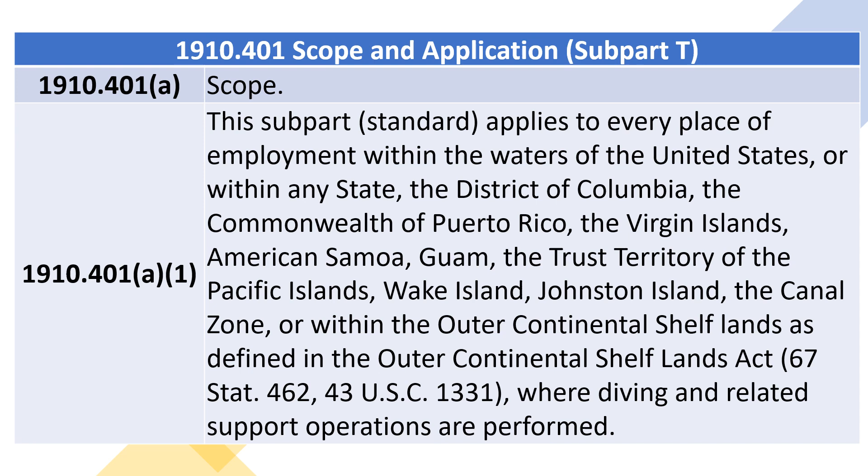1910.401, A2: This standard applies to diving and related support operations conducted in connection with all types of work and employments, including general industry, construction, ship repairing, shipbuilding, shipbreaking, and longshoring. However, this standard does not apply to any diving operation.

1910.401, A2, I through A2, 3: performed solely for instructional purposes, using open circuit, compressed air SCUBA, and conducted within the no decompression limits.

Performed solely for search, rescue, or related public safety purposes by or under the control of a governmental agency, or governed by 45 CFR Part 46, Protection of Human Subjects, U.S. Department of Health and Human Services, or equivalent rules or regulations established by another federal agency, which regulate research, development, or related purposes involving human subjects.

1910.401, A2, 4: defined as scientific diving and which is under the direction and control of a diving program containing at least the following elements.

1910.401, A2, 4, A: Diving Safety Manual, which includes at a minimum, procedures covering all diving operations specific to the program, procedures for emergency care, including recompression and evacuation, and criteria for diver training and certification.

1910.401, A2, 4, B: Diving Control, Safety, Board, with the majority of its members being active divers, which shall at a minimum have the authority to approve and monitor diving projects, review and revise the Diving Safety Manual, assure compliance with the manual, certify the depths to which a diver has been trained, take disciplinary action for unsafe practices, and assure adherence to the buddy system.

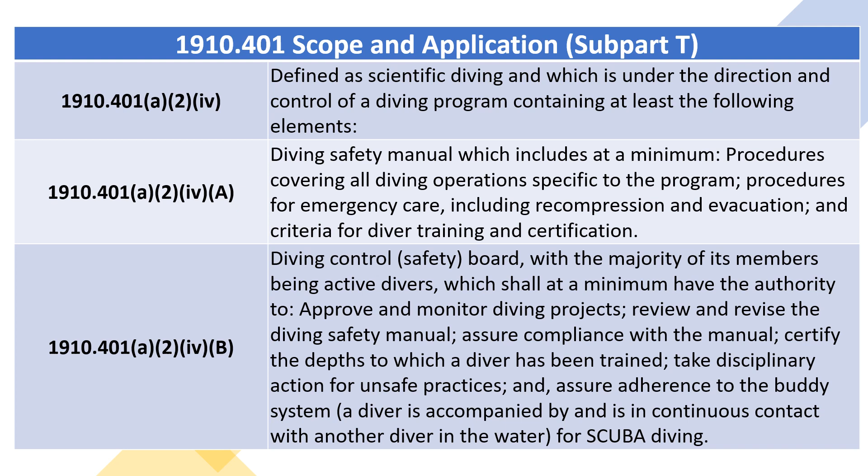1910.401, A3: Alternative Requirements for Recreational Diving Instructors and Diving Guides. Employers of recreational diving instructors and diving guides are not required to comply with the decompression chamber requirements specified by paragraphs B2 and C3 of Section 1910.423 and paragraph B1 of Section 1910.426 when they meet all of the following conditions.

1910.401, A3, I through A3: The instructor or guide is engaging solely in recreational diving instruction or dive guiding operations. The instructor or guide is diving within the no decompression limits in these operations.

The instructor or guide is using a nitrox breathing gas mixture consisting of a high percentage of oxygen, more than 22% by volume, mixed with nitrogen.

The instructor or guide is using an open circuit, semi-closed circuit, or closed circuit self-contained underwater breathing apparatus, SCUBA, and the employer of the instructor or guide is complying with all requirements of Appendix C of this subpart.

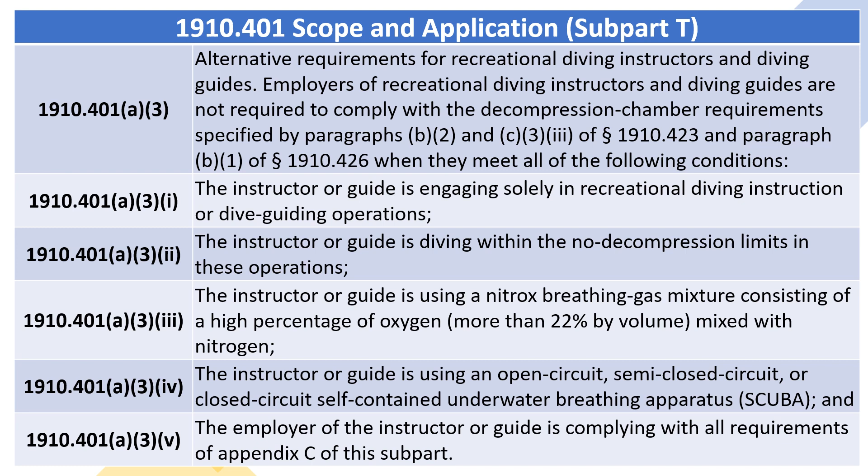1910.401, B: Application in Emergencies. An employer may deviate from the requirements of this standard to the extent necessary to prevent or minimize a situation which is likely to cause death, serious physical harm, or major environmental damage, provided that the employer 1910.401, B1, notifies...

Notifies the Area Director, Occupational Safety and Health Administration within 48 hours of the onset of the emergency situation, indicating the nature of the emergency and extent of the deviation from the prescribed regulations, and 1910.401, B2, upon request from the Area Director, submits such information in writing.

1910.401, C: Employer Obligation. The employer shall be responsible for compliance with 1910.401, C1, all provisions of this standard of general applicability, and 1910.401, C2, all requirements pertaining to specific diving modes to the extent diving operations in such modes are conducted.

1910.402. Definitions. As used in this standard, the listed terms are defined as follows: ACFM, actual cubic feet per minute. ASME code or equivalent: ASME, American Society of Mechanical Engineers, Boiler and Pressure Vessel Code, Section 8, or an equivalent code which the employer can demonstrate to be equally effective.

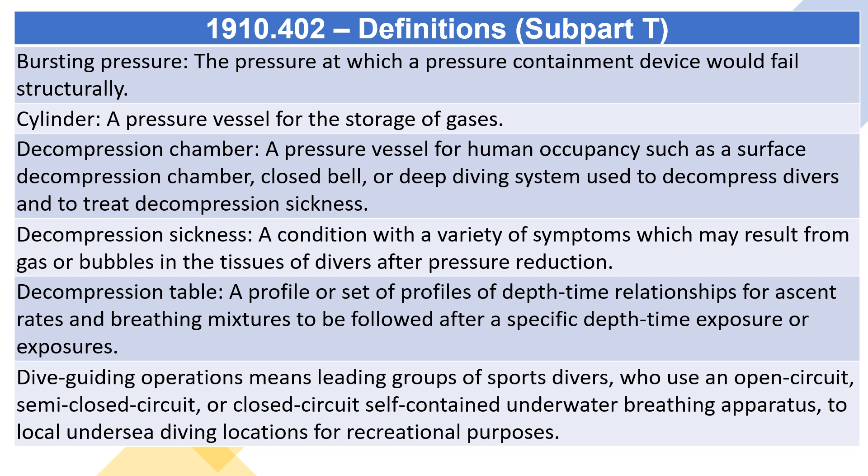Dive location: a surface or vessel from which a diving operation is conducted. Dive location reserve breathing gas: a supply system of air or mixed gas, as appropriate, at the dive location which is independent of the primary supply system and sufficient to support divers during the planned decompression.

Dive team: divers and support employees involved in a diving operation, including the designated person in charge. Diver: an employee working in water using underwater apparatus which supplies compressed breathing gas at the ambient pressure.

Diver carried reserve breathing gas: a diver carried supply of air or mixed gas, as appropriate, sufficient under standard operating conditions to allow the diver to reach the surface, or another source of breathing gas, or to be reached by a standby diver. Diving mode: a type of diving requiring specific equipment, procedures and techniques - SCUBA, surface supplied air, or mixed gas.

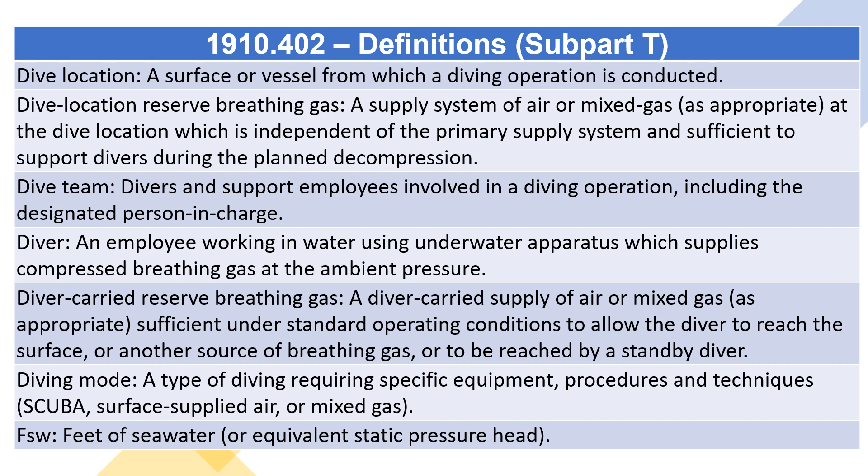FSW: feet of seawater, or equivalent static pressure head. Heavy gear: diver worn deep sea dress including helmet, breastplate, dry suit, and weighted shoes. Hyperbaric conditions: pressure conditions in excess of surface pressure.

In-water stage: a suspended underwater platform which supports a diver in the water. Liveboating: the practice of supporting a surface-supplied air or mixed gas diver from a vessel which is underway. Mixed gas diving: a diving mode in which the diver is supplied in the water with a breathing gas other than air.

No decompression limits: the depth time limits of the no decompression limits and repetitive dive group designation table for no decompression air dives, US Navy diving manual, or equivalent limits which the employer can demonstrate to be equally effective. PSIG: pounds per square inch, gauge.

Recreational diving instruction means training diving students in the use of recreational diving procedures and the safe operation of diving equipment, including an open circuit, semi-closed circuit, or closed circuit self-contained underwater breathing apparatus during dives.

Scientific diving means diving performed solely as a necessary part of a scientific, research, or educational activity by employees whose sole purpose for diving is to perform scientific research tasks. Scientific diving does not include performing any tasks usually associated with commercial diving, such as placing or removing heavy objects underwater, inspection of pipelines and similar objects, construction, demolition, cutting or welding, or the use of explosives.

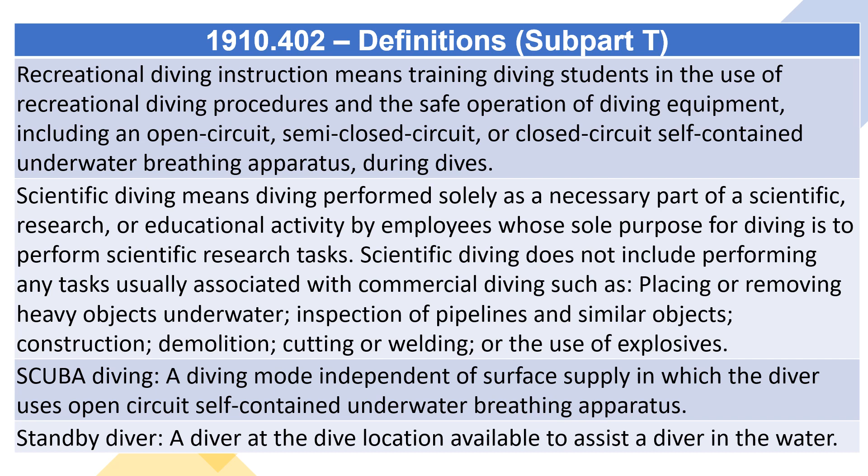Surface-supplied air diving: a diving mode in which the diver in the water is supplied from the dive location with compressed air for breathing. Treatment table: a depth time and breathing gas profile designed to treat decompression sickness.

Umbilical: the composite hose bundle between a dive location and a diver or bell, or between a diver and a bell, which supplies the diver or bell with breathing gas, communications, power, or heat as appropriate to the diving mode or conditions, and includes a safety line between the diver and the dive location.

Volume tank: a pressure vessel connected to the outlet of a compressor and used as an air reservoir. Working pressure: the maximum pressure to which a pressure containment device may be exposed under standard operating conditions.

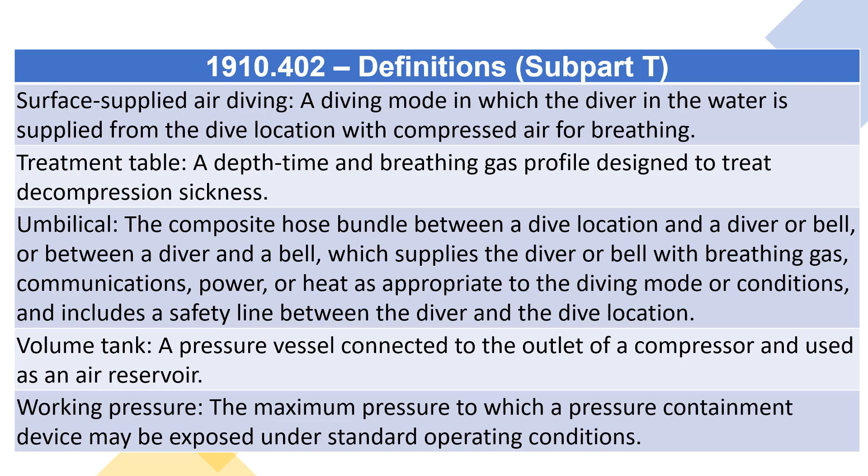1910.410 Qualifications of Dive Team. A. General. 1. Each dive team member shall have the experience or training necessary to perform assigned tasks in a safe and healthful manner.

1910.410 A.2. Each dive team member shall have experience or training in the following: 1910.410 A.2.i through A.2.iii - the use of tools, equipment, and systems relevant to assigned tasks, techniques of the assigned diving mode, and diving operations and emergency procedures.

1910.410 A.3. All dive team members shall be trained in cardiopulmonary resuscitation and first aid, American Red Cross standard course or equivalent.

1910.410 A.4. Dive team members who are exposed to or control the exposure of others to hyperbaric conditions shall be trained in diving-related physics and physiology.

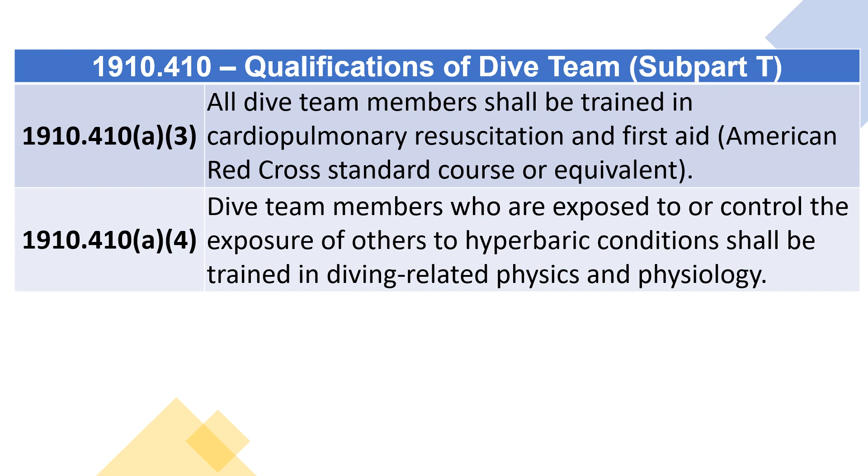1910.410 B. Assignments. 1. Each dive team member shall be assigned tasks in accordance with the employee's experience or training, except that limited additional tasks may be assigned to an employee undergoing training, provided that these tasks are performed under the direct supervision of an experienced dive team member.

1910.410(b)(2). The employer shall not require a dive team member to be exposed to hyperbaric conditions against the employee's will, except when necessary to complete decompression or treatment procedures.

1910.410(b)(3). The employer shall not permit a dive team member to dive or be otherwise exposed to hyperbaric conditions for the duration of any temporary physical impairment or condition which is known to the employer and is likely to affect adversely the safety or health of a dive team member.

1910.410(c). Designated person in charge. 1910.410(c)(1). The employer or an employee designated by the employer shall be at the dive location in charge of all aspects of the diving operation affecting the safety and health of dive team members. 1910.410(c)(2). The designated person in charge shall have experience and training in the conduct of the assigned diving operation.

1910.420 Safe Practices Manual. 1910.420(a). General. The employer shall develop and maintain a safe practices manual which shall be made available at the dive location to each dive team member.

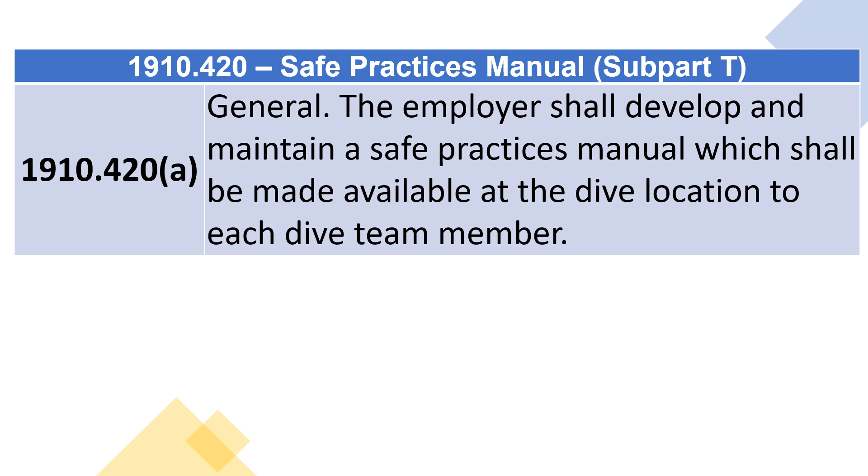1910.420(b). Contents. 1910.420(b)(1). The Safe Practices Manual shall contain a copy of this standard and the employer's policies for implementing the requirements of this standard.

1910.420(b)(2). For each diving mode engaged in, the Safe Practices Manual shall include (i) through (iv): safety procedures and checklists for diving operations, assignments and responsibilities of the dive team members, equipment procedures and checklists, and emergency procedures for fire, equipment failure, adverse environmental conditions, and medical illness and injury.

1910.421 Pre-dive procedures. 1910.421(a). General. The employer shall comply with the following requirements prior to each diving operation, unless otherwise specified.

1910.421(b). Emergency aid. A list shall be kept at the dive location of the telephone or call numbers of the following: 1910.421(b)(1) through (5): an operational decompression chamber, if not at the dive location, accessible hospitals, available physicians, available means of transportation, and the nearest U.S. Coast Guard Rescue Coordination Center.

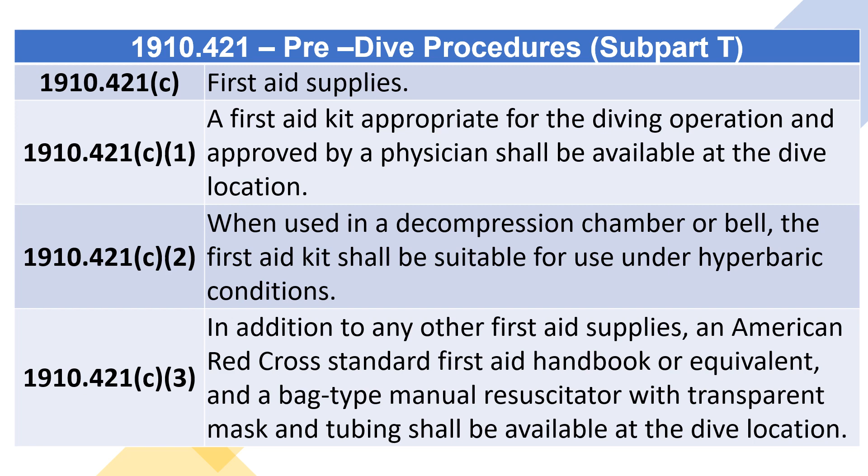1910.421(c)(3). In addition to any other first aid supplies, an American Red Cross Standard First Aid Handbook or equivalent, and a bag-type manual resuscitator with transparent mask and tubing shall be available at the dive location.

1910.421(d). Planning and assessment. Planning of a diving operation shall include an assessment of the safety and health aspects of the following.

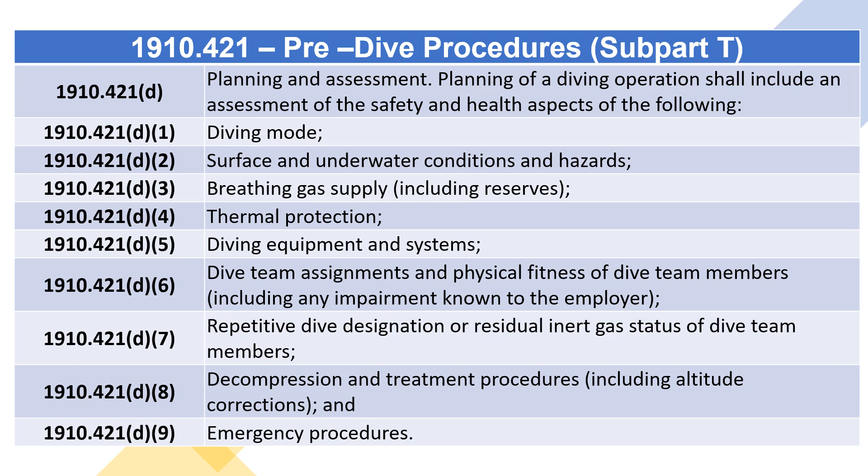1910.421(d)(1) through (9): diving mode, surface and underwater conditions and hazards, breathing gas supply, including reserves, thermal protection, diving equipment and systems, dive team assignments and physical fitness of dive team members, including any impairment known to the employer, repetitive dive designation or residual inert gas status of dive team members, decompression and treatment procedures, including altitude corrections, and emergency procedures.

1910.421(e). Hazardous activities. To minimize hazards to the dive team, diving operations shall be coordinated with other activities in the vicinity which are likely to interfere with the diving operation.

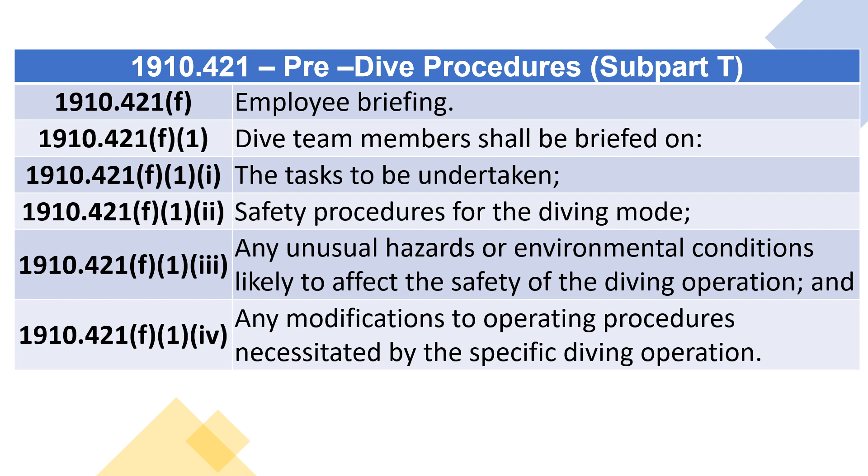1910.421(f). Employee briefing. 1910.421(f)(1). Dive team members shall be briefed on (i) through (iv): the tasks to be undertaken, safety procedures for the diving mode, any unusual hazards or environmental conditions likely to affect the safety of the diving operation, and any modifications to operating procedures necessitated by the specific diving operation.

1910.421(f)(2). Prior to making individual dive team member assignments, the employer shall inquire into the dive team member's current state of physical fitness and indicate to the dive team member the procedure for reporting physical problems or adverse physiological effects during and after the dive.

1910.421(g). Equipment inspection. The breathing gas supply system, including reserve breathing gas supplies, masks, helmets, thermal protection, and bell handling mechanism, when appropriate, shall be inspected prior to each dive.

1910.421(h). Warning signal. When diving from surfaces other than vessels in areas capable of supporting marine traffic, a rigid replica of the International Code Flag A at least 1 meter in height shall be displayed at the dive location in a manner which allows all-round visibility, and shall be illuminated during night diving operations.

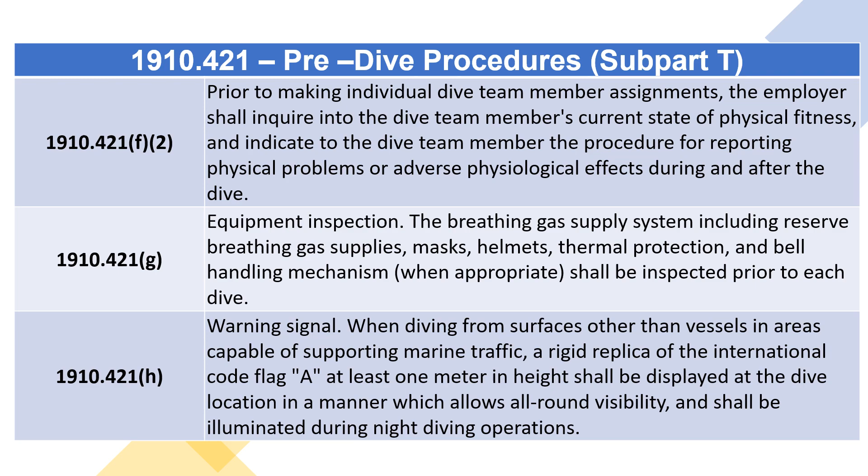1910.422. Procedures during dive. 1910.422(a). General. The employer shall comply with the following requirements which are applicable to each diving operation unless otherwise specified.

1910.422(b). Water entry and exit. 1910.422(b)(1). A means capable of supporting the diver shall be provided for entering and exiting the water. 1910.422(b)(2). The means provided for exiting the water shall extend below the water surface.

1910.422(b)(3): A means shall be provided to assist an injured diver from the water or into a bell.

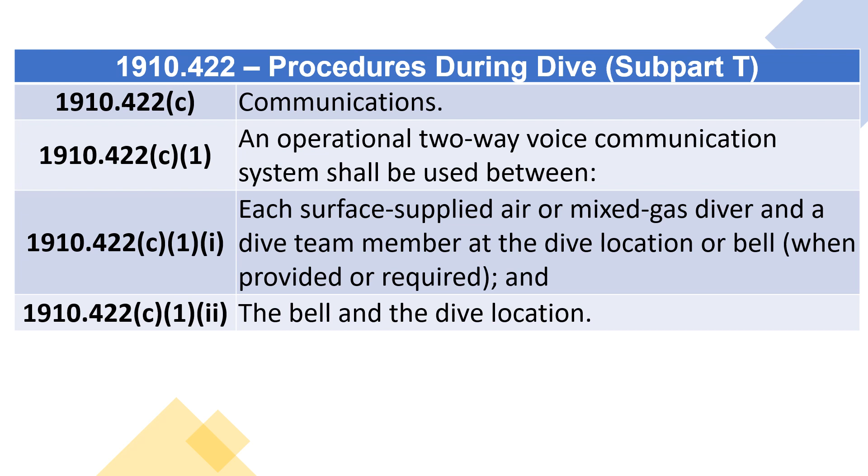1910.422(c) Communications. (c)(1): An operational two-way voice communication system shall be used between each surface-supplied air or mixed gas diver and a dive team member at the dive location or bell, when provided or required, and the bell and the dive location. (c)(2): An operational, two-way communication system shall be available at the dive location to obtain emergency assistance.

1910.422(d) Decompression tables: Decompression, repetitive, and no decompression tables, as appropriate, shall be at the dive location. 1910.422(e) Dive profiles: A depth time profile, including when appropriate any breathing gas changes, shall be maintained for each diver during the dive, including decompression.

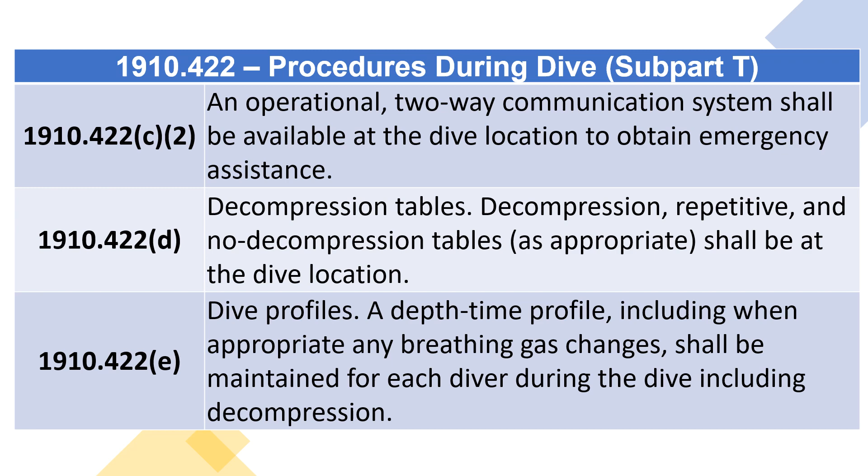1910.422(f) Handheld power tools and equipment. (f)(1): Handheld electrical tools and equipment shall be de-energized before being placed into or retrieved from the water. (f)(2): Handheld power tools shall not be supplied with power from the dive location until requested by the diver.

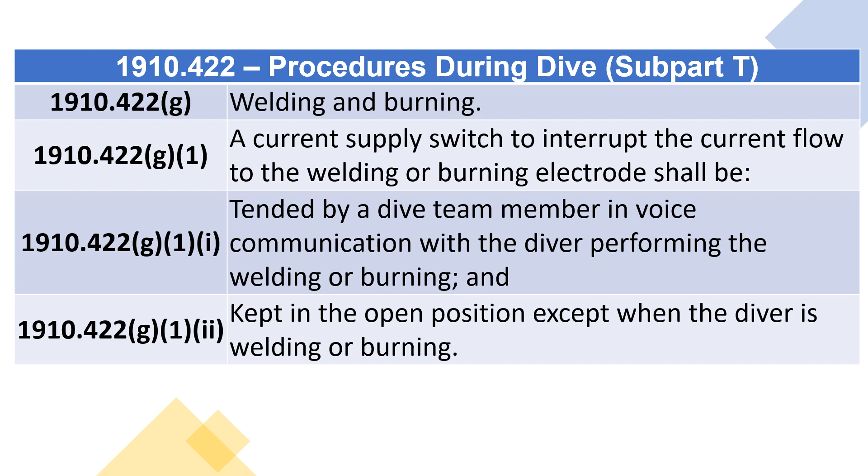1910.422(g) Welding and burning. (g)(1): A current supply switch to interrupt the current flow to the welding or burning electrode shall be tended by a dive team member in voice communication with the diver performing the welding or burning, and kept in the open position except when the diver is welding or burning.

1910.422(g)(2): The welding machine frame shall be grounded. (g)(3): Welding and burning cables, electrode holders, and connections shall be capable of carrying the maximum current required by the work, and shall be properly insulated. (g)(4): Insulated gloves shall be provided to divers performing welding and burning operations.

1910.422(g)(5): Prior to welding or burning on closed compartments, structures, or pipes, which contain a flammable vapor or in which a flammable vapor may be generated by the work, they shall be vented, flooded, or purged with a mixture of gases which will not support combustion.

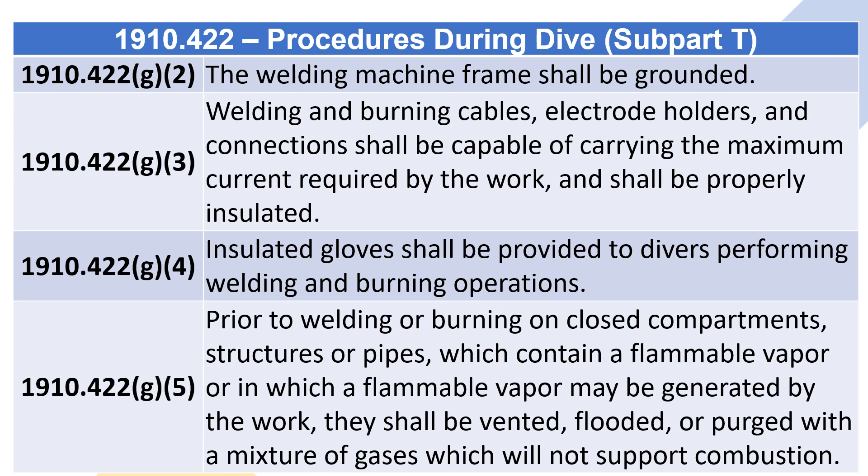1910.422(h) Explosives. (h)(1): Employers shall transport, store, and use explosives in accordance with this section and the applicable provisions of sections 1910.109 and 1926.912 of Title 29 of the Code of Federal Regulations. (h)(2): Electrical continuity of explosive circuits shall not be tested until the diver is out of the water. (h)(3): Explosives shall not be detonated while the diver is in the water.

1910.422(i) Termination of dive. The working interval of a dive shall be terminated when: (i)(1) a diver requests termination; (i)(2) a diver fails to respond correctly to communications or signals from a dive team member.

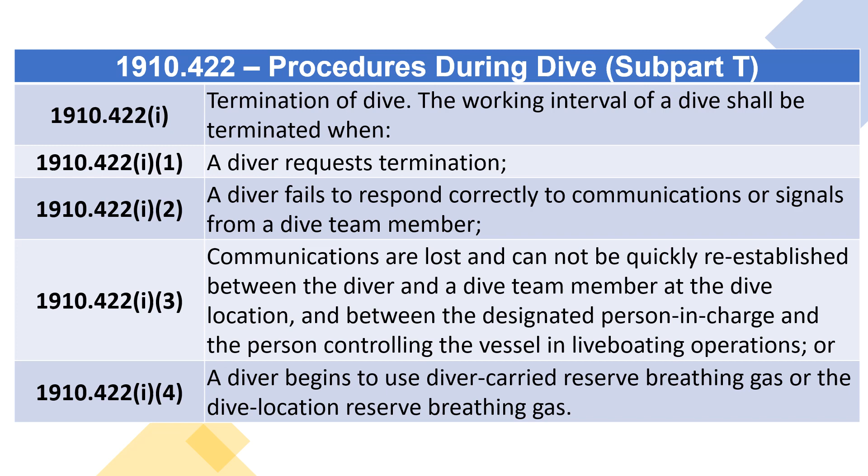1910.422(i)(3): Communications are lost and cannot be quickly re-established between the diver and a dive team member at the dive location, and between the designated person in charge and the person controlling the vessel in live boating operations; or (i)(4): a diver begins to use diver-carried reserve breathing gas or the dive location reserve breathing gas.

1910.423 Post-dive procedures. (A) General: The employer shall comply with the following requirements which are applicable after each diving operation, unless otherwise specified.

1910.423(b) Precautions. (b)(1): After the completion of any dive, the employer shall check the physical condition of the diver; instruct the diver to report any physical problems or adverse physiological effects, including symptoms of decompression sickness; advise the diver of the location of a decompression chamber which is ready for use; and alert the diver to the potential hazards of flying after diving.

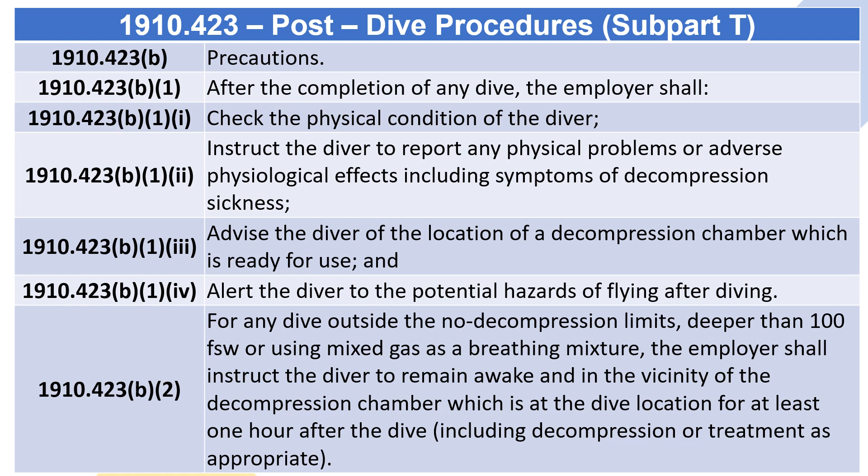1910.423(b)(2): For any dive outside the no decompression limits, deeper than 100 FSW, or using mixed gas as a breathing mixture, the employer shall instruct the diver to remain awake and in the vicinity of the decompression chamber which is at the dive location for at least 1 hour after the dive, including decompression or treatment as appropriate.

1910.423(c) Recompression capability. (c)(1): A decompression chamber capable of recompressing the diver at the surface to a minimum of 165 FSW, 6 ATA, shall be available at the dive location for surface supplied air diving to depths deeper than 100 FSW and shallower than 220 FSW; mixed gas diving shallower than 300 FSW; or diving outside the no decompression limits shallower than 300 FSW.

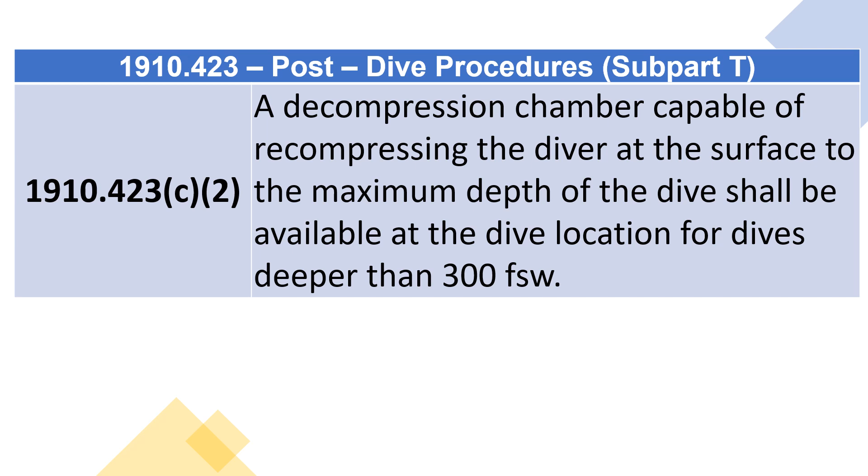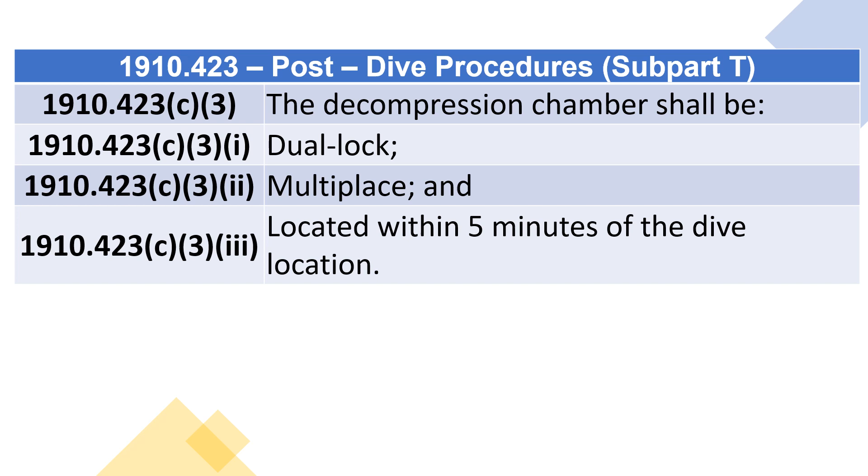1910.423(c)(2): A decompression chamber capable of recompressing the diver at the surface to the maximum depth of the dive shall be available at the dive location for dives deeper than 300 FSW. (c)(3): The decompression chamber shall be dual lock, multi-place, and located within 5 minutes of the dive location.

1910.423(c)(4): The decompression chamber shall be equipped with a pressure gauge for each pressurized compartment designed for human occupancy; a built-in breathing system with a minimum of 1 mask per occupant; a two-way voice communication system between occupants and a dive team member at the dive location; and a viewport and illumination capability to light the interior.

1910.423 C5: Treatment tables, treatment gas appropriate to the diving mode, and sufficient gas to conduct treatment shall be available at the dive location. 1910.423 C6: A dive team member shall be available at the dive location during and for at least 1 hour after the dive to operate the decompression chamber, when required or provided.

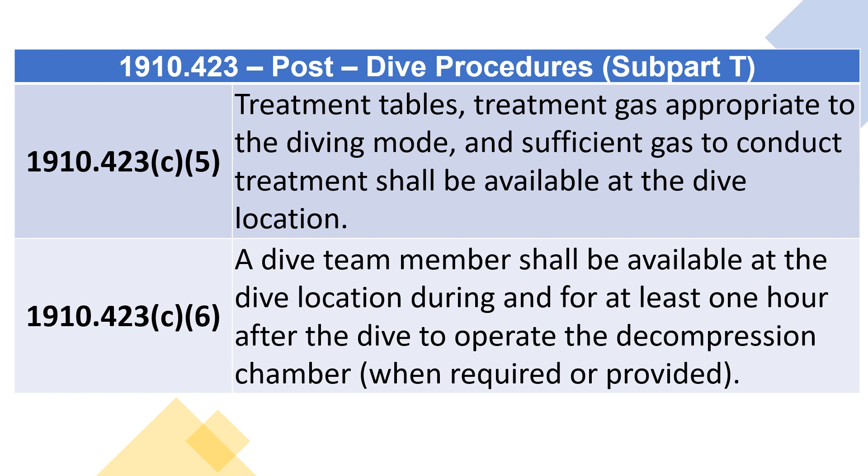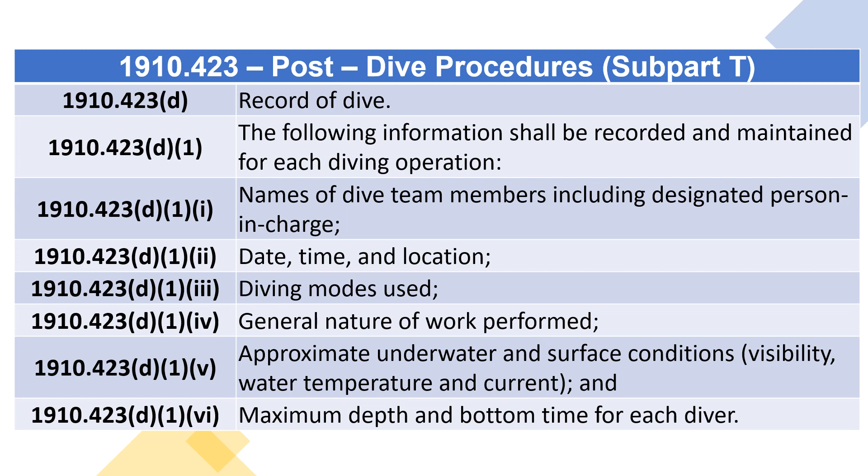1910.423 D: Record of dive. D1: The following information shall be recorded and maintained for each diving operation: names of dive team members including designated person in charge, date, time, and location, diving modes used, general nature of work performed, approximate underwater and surface conditions, visibility, water temperature and current, and maximum depth and bottom time for each diver.

1910.423 D2: For each dive outside the no decompression limits, deeper than 100 FSW, or using mixed gas, the following additional information shall be recorded and maintained: depth, time and breathing gas profiles, decompression table designation including modification, and elapsed time since last pressure exposure if less than 24 hours, or repetitive dive designation for each diver.

1910.423 D3: For each dive in which decompression sickness is suspected or symptoms are evident, the following additional information shall be recorded and maintained: description of decompression sickness symptoms, including depth and time of onset, and description and results of treatment.

1910.423 E: Decompression procedure assessment. The employer shall: E1, investigate and evaluate each incident of decompression sickness based on the recorded information, consideration of the past performance of decompression table used, and individual susceptibility.

1910.423 E2: Take appropriate corrective action to reduce the probability of recurrence of decompression sickness. And E3: Prepare a written evaluation of the decompression procedure assessment, including any corrective action taken, within 45 days of the incident of decompression sickness.

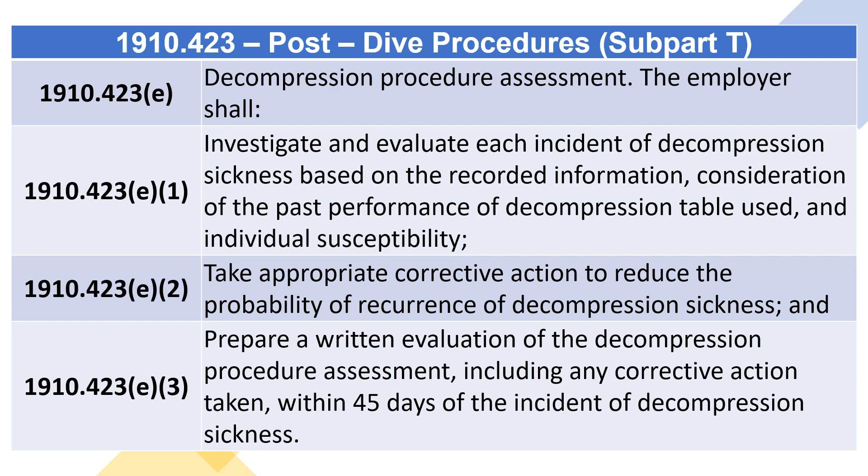1910.424 Scuba diving. A: General. Employers engaged in scuba diving shall comply with the following requirements, unless otherwise specified. B: Limits. Scuba diving shall not be conducted at depths deeper than 130 FSW.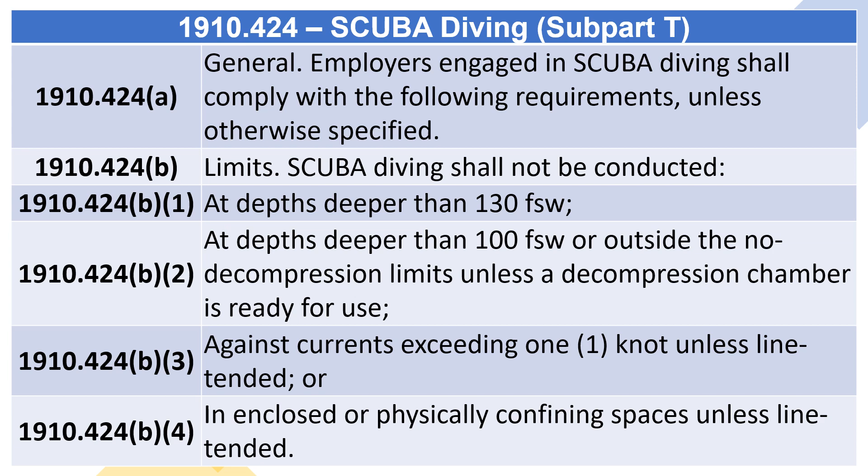1910.424 B2: At depths deeper than 100 FSW or outside the no decompression limits, unless a decompression chamber is ready for use. B3: Against currents exceeding 1 knot unless line tended, or B4: In enclosed or physically confining spaces unless line tended.

1910.424 C: Procedures. C1: A standby diver shall be available while a diver is in the water. C2: A diver shall be line tended from the surface, or accompanied by another diver in the water in continuous visual contact during the diving operations.

1910.424 C3: A diver shall be stationed at the underwater point of entry when diving is conducted in enclosed or physically confining spaces. C4: A diver carried reserve breathing gas supply shall be provided for each diver consisting of a manual reserve J valve, or an independent reserve cylinder with a separate regulator or connected to the underwater breathing apparatus. C5: The valve of the reserve breathing gas supply shall be in the closed position prior to the dive.

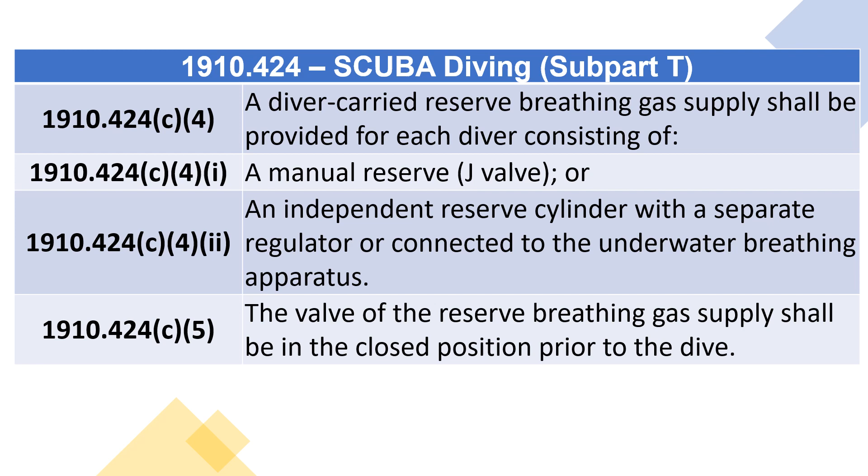1910.425 Surface supplied air diving. A: General. Employers engaged in surface supplied air diving shall comply with the following requirements, unless otherwise specified. B: Limits. B1: Surface supplied air diving shall not be conducted at depths deeper than 190 FSW, except that dives with bottom times of 30 minutes or less may be conducted to depths of 220 FSW.

1910.425 B2: A decompression chamber shall be ready for use at the dive location for any dive outside the no decompression limits or deeper than 100 FSW. B3: A bell shall be used for dives with an in-water decompression time greater than 120 minutes, except when heavy gear is worn or diving is conducted in physically confining spaces.

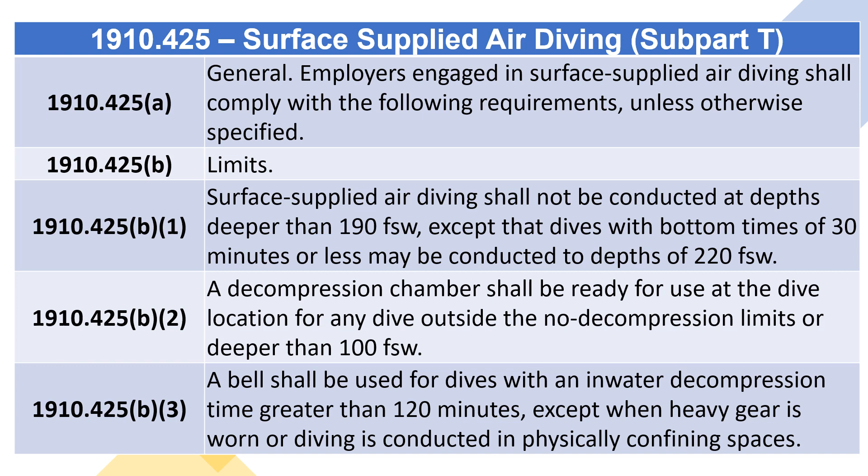1910.425 C: Procedures. C1: Each diver shall be continuously tended while in the water. C2: A diver shall be stationed at the underwater point of entry when diving is conducted in enclosed or physically confining spaces. C3: Each diving operation shall have a primary breathing gas supply sufficient to support divers for the duration of the planned dive, including decompression.

1910.425 C4: For dives deeper than 100 FSW or outside the no decompression limits: a separate dive team member shall tend each diver in the water. A standby diver shall be available while a diver is in the water. A diver carried reserve breathing gas supply shall be provided for each diver except when heavy gear is worn, and a dive location reserve breathing gas supply shall be provided.

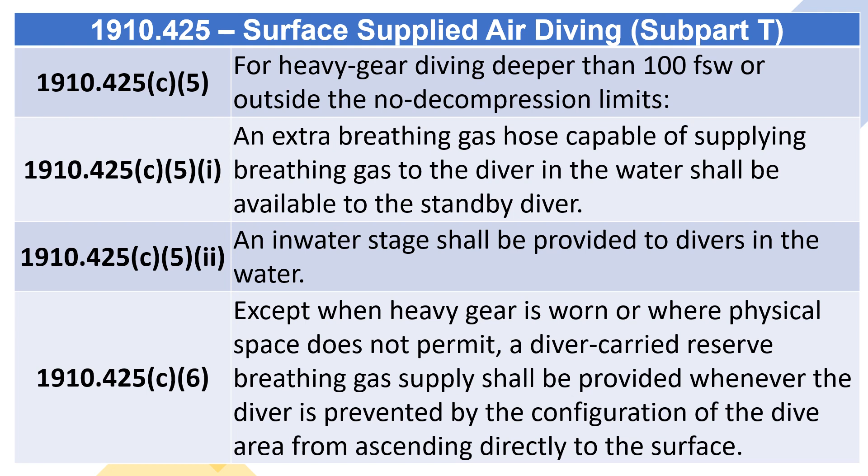1910.425 C5: For heavy gear diving deeper than 100 FSW or outside the no decompression limits: an extra breathing gas hose capable of supplying breathing gas to the diver in the water shall be available to the standby diver, and an in-water stage shall be provided to divers in the water. 1910.425 C6: Except when heavy gear is worn or where physical space does not permit, a diver-carried reserve breathing gas supply shall be provided whenever the diver is prevented by the configuration of the dive area from ascending directly to the surface.

1910.426 Mixed gas diving. A. General: Employers engaged in mixed gas diving shall comply with the following requirements, unless otherwise specified. B. Limits: Mixed gas diving shall be conducted only when a decompression chamber is ready for use at the dive location, and a bell is used at depths greater than 220 FSW or when the dive involves in-water decompression time of greater than 120 minutes, except when heavy gear is worn or when diving in physically confining spaces, or a closed bell is used at depths greater than 300 FSW, except when diving is conducted in physically confining spaces.

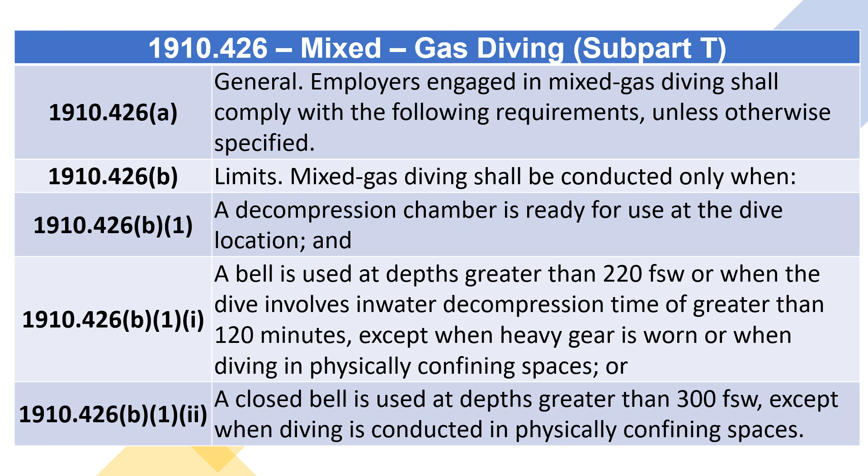1910.426 C. Procedures. C1: A separate dive team member shall tend each diver in the water. C2: A standby diver shall be available while a diver is in the water. C3: A diver shall be stationed at the underwater point of entry when diving is conducted in enclosed or physically confining spaces. C4: Each diving operation shall have a primary breathing gas supply sufficient to support divers for the duration of the planned dive, including decompression. C5: Each diving operation shall have a dive location reserve breathing gas supply.

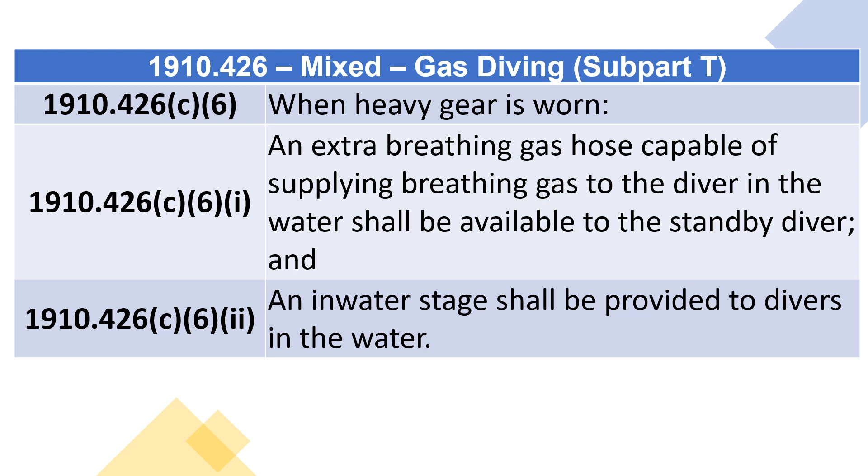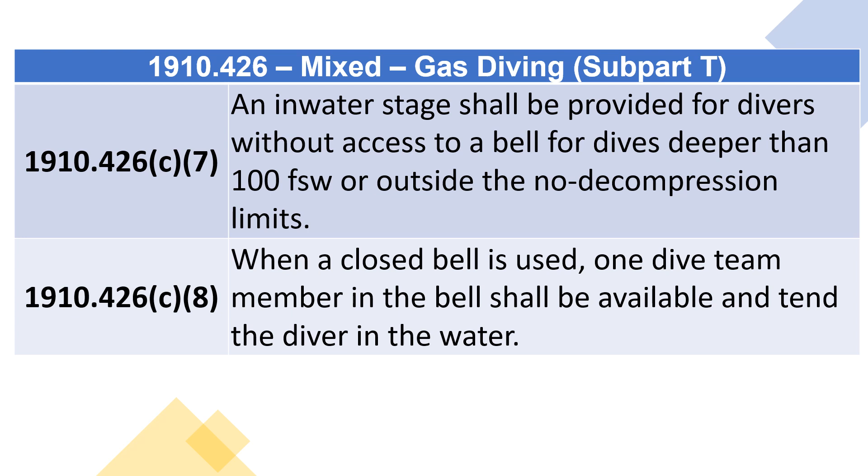1910.426 C6: When heavy gear is worn, an extra breathing gas hose capable of supplying breathing gas to the diver in the water shall be available to the standby diver, and an in-water stage shall be provided to divers in the water. C7: An in-water stage shall be provided for divers without access to a bell for dives deeper than 100 FSW or outside the no decompression limits. C8: When a closed bell is used, one dive team member in the bell shall be available and tend the diver in the water.

1910.426 C9: Except when heavy gear is worn or where physical space does not permit, a diver-carried reserve breathing gas supply shall be provided for each diver diving deeper than 100 FSW or outside the no decompression limits, or prevented by the configuration of the dive area from directly ascending to the surface.

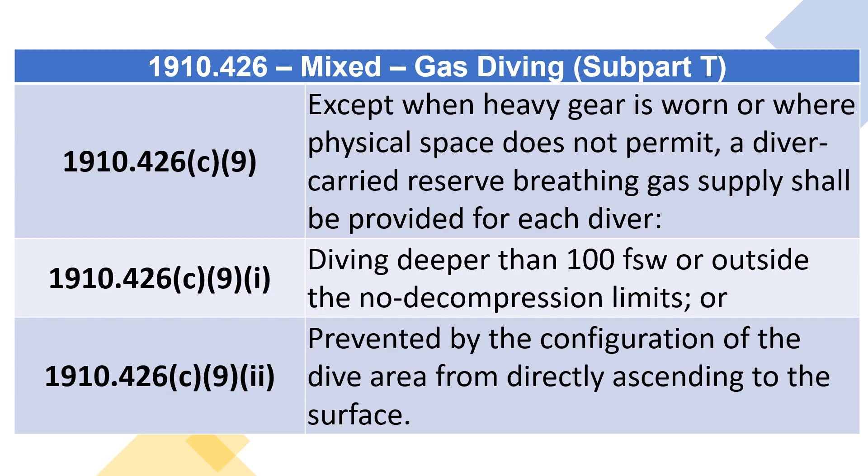1910.427 Liveboating. A. General: Employers engaged in diving operations involving liveboating shall comply with the following requirements. B. Limits: Diving operations involving liveboating shall not be conducted with an in-water decompression time of greater than 120 minutes, using surface-supplied air at depths deeper than 190 FSW, except that dives with bottom times of 30 minutes or less may be conducted to depths of 220 FSW, using mixed gas at depths greater than 220 FSW, in rough seas which significantly impede diver mobility or work function, or in other than daylight hours.

1910.427 C. Procedures. The propeller of the vessel shall be stopped before the diver enters or exits the water. A device shall be used which minimizes the possibility of entanglement of the diver's hose in the propeller of the vessel. Two-way voice communication between the designated person in charge and the person controlling the vessel shall be available while the diver is in the water. A standby diver shall be available while a diver is in the water. A diver-carried reserve breathing gas supply shall be carried by each diver engaged in liveboating operations.

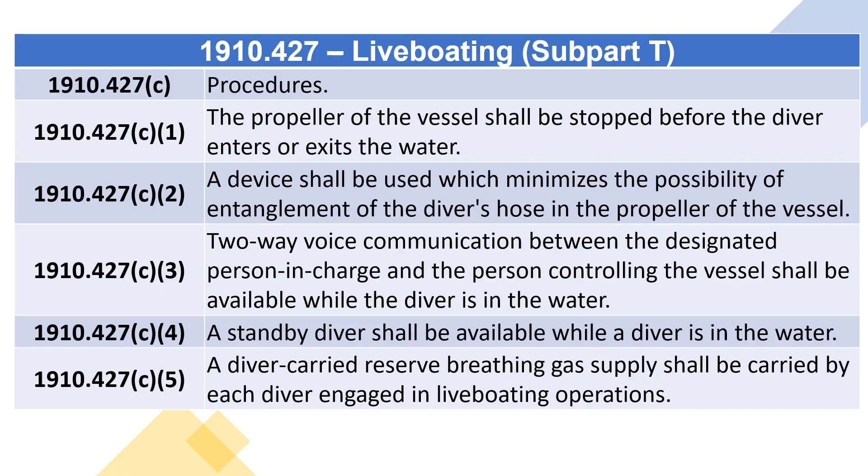1910.430 Equipment. A. General. A1: All employers shall comply with the following requirements, unless otherwise specified. A2: Each equipment modification, repair, test, calibration or maintenance service shall be recorded by means of a tagging or logging system, and include the date and nature of work performed, and the name or initials of the person performing the work.

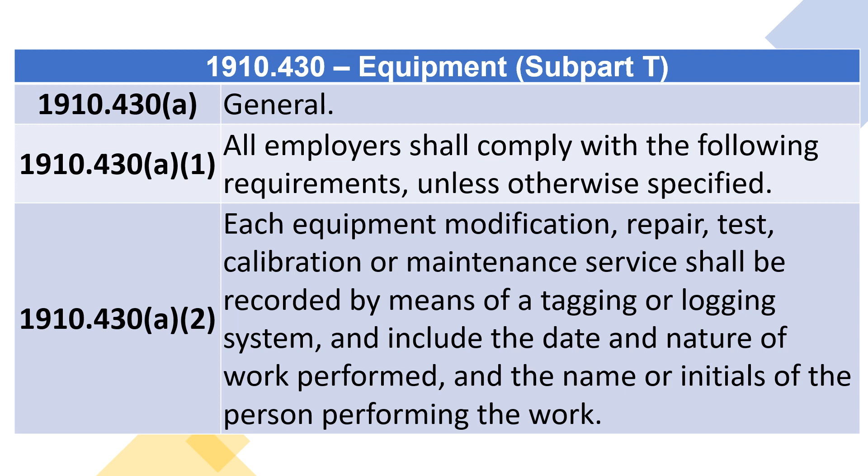1910.430 B. Air compressor system. B1: Compressors used to supply air to the diver shall be equipped with a volume tank with a check valve on the inlet side, a pressure gauge, a relief valve, and a drain valve. B2: Air compressor intakes shall be located away from areas containing exhaust or other contaminants.

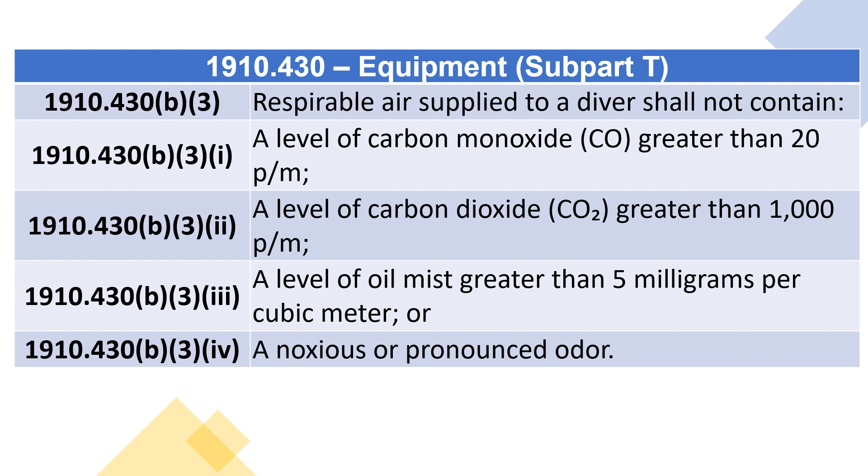1910.430 B3: Respirable air supplied to a diver shall not contain a level of carbon monoxide (CO) greater than 20 ppm, a level of carbon dioxide (CO2) greater than 1000 ppm, a level of oil mist greater than 5 mg per cubic meter, or a noxious or pronounced odor.

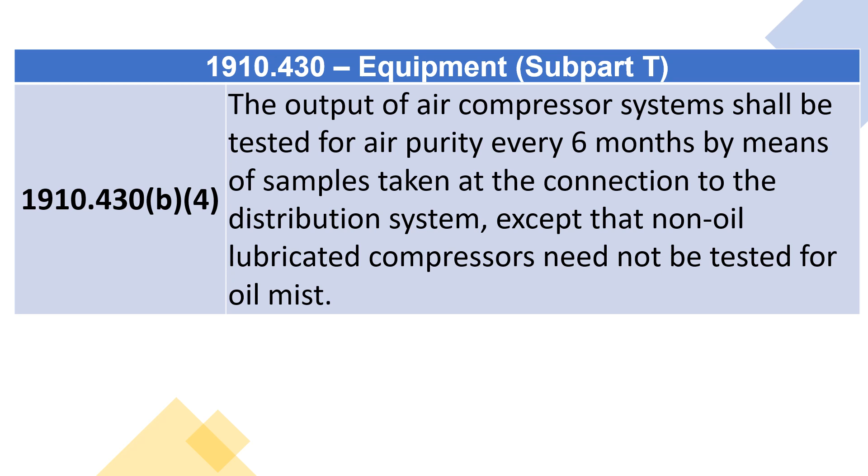1910.430(b)(4): The output of air compressor systems shall be tested for air purity every 6 months by means of samples taken at the connection to the distribution system, except that non-oil lubricated compressors need not be tested for oil mist.

1910.430(c), breathing gas supply hoses. 1910.430(c)(1): breathing gas supply hoses shall have a working pressure at least equal to the working pressure of the total breathing gas system, have a rated bursting pressure at least equal to 4 times the working pressure, be tested at least annually to 1.5 times their working pressure, and have their open ends taped, capped, or plugged when not in use.

1910.430(c)(2): breathing gas supply hose connectors shall be made of corrosion-resistant materials, have a working pressure at least equal to the working pressure of the hose to which they are attached, and be resistant to accidental disengagement.

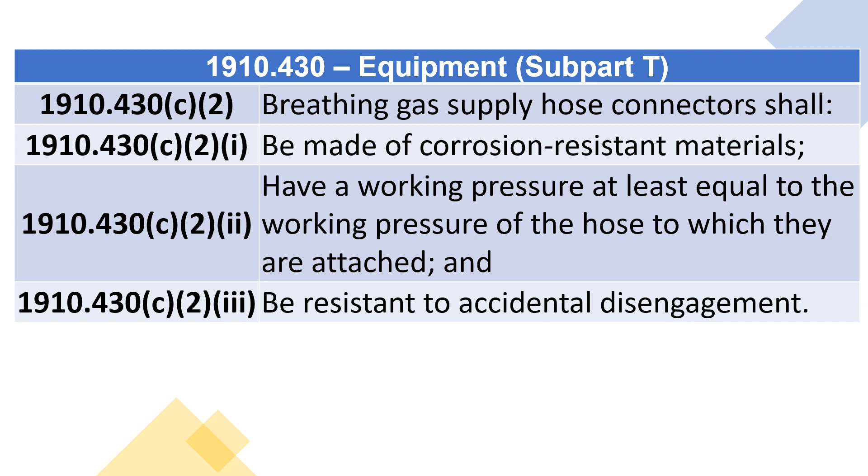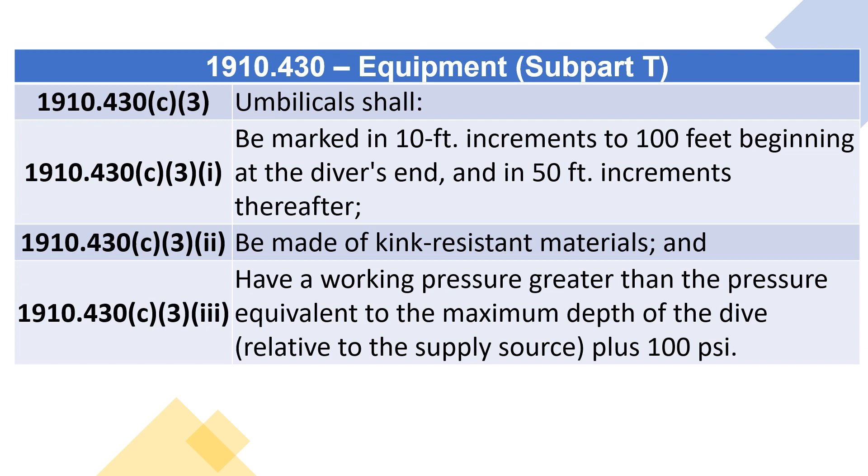1910.430(c)(3): umbilicals shall be marked in 10 feet increments to 100 feet beginning at the diver's end, and in 50 feet increments thereafter, be made of kink-resistant materials, and have a working pressure greater than the pressure equivalent to the maximum depth of the dive, relative to the supply source, plus 100 psi.

1910.430(d), buoyancy control. 1910.430(d)(1): helmets or masks connected directly to the dry suit or other buoyancy changing equipment shall be equipped with an exhaust valve.

1910.430(d)(2): a dry suit or other buoyancy changing equipment not directly connected to the helmet or mask shall be equipped with an exhaust valve.

1910.430(d)(3): when used for scuba diving, a buoyancy compensator shall have an inflation source separate from the breathing gas supply.

1910.430(d)(4): an inflatable flotation device capable of maintaining the diver at the surface in a face-up position, having a manually activated inflation source independent of the breathing supply, an oral inflation device, and an exhaust valve shall be used for scuba diving.

1910.430(e), compressed gas cylinders. Compressed gas cylinders shall: 1910.430(e)(1) be designed, constructed and maintained in accordance with the applicable provisions of 29 CFR 1910.101 and 1910.169 through 1910.171.

1910.430(e)(2) be stored in a ventilated area and protected from excessive heat. 1910.430(e)(3) be secured from falling, and 1910.430(e)(4) have shut-off valves recessed into the cylinder or protected by a cap, except when in use or manifold, or when used for scuba diving.

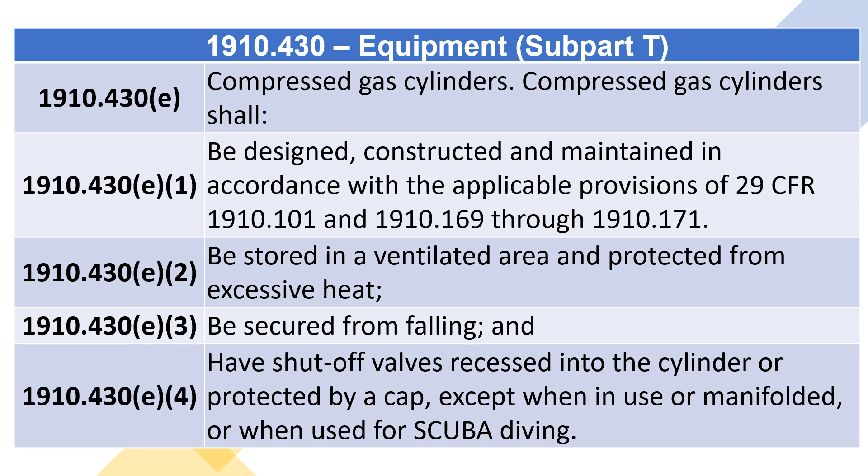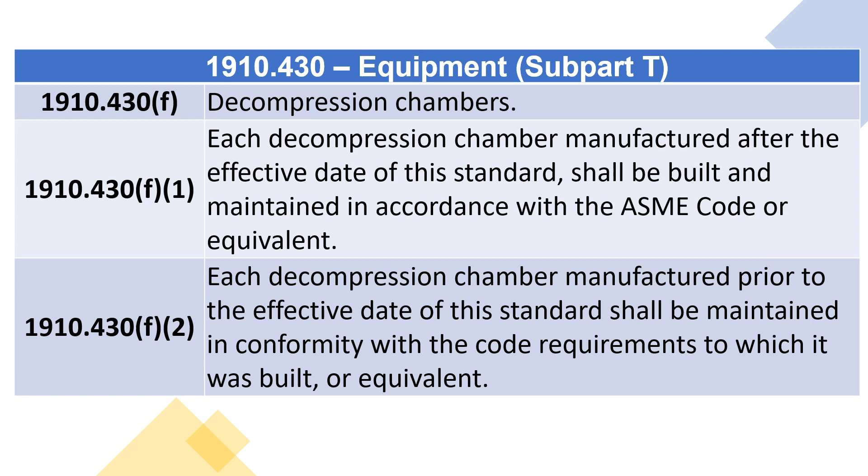1910.430(f), decompression chambers. 1910.430(f)(1): each decompression chamber manufactured after the effective date of this standard shall be built and maintained in accordance with the ASME code or equivalent. 1910.430(f)(2): each decompression chamber manufactured prior to the effective date of this standard shall be maintained in conformity with the code requirements to which it was built, or equivalent.

1910.430(f)(3): each decompression chamber shall be equipped with means to maintain the atmosphere below a level of 25% oxygen by volume, mufflers on intake and exhaust lines, which shall be regularly inspected and maintained, suction guards on exhaust line openings, and a means for extinguishing fire, and shall be maintained to minimize sources of ignition and combustible material.

1910.430(g), gauges and timekeeping devices. 1910.430(g)(1): gauges indicating diver depth which can be read at the dive location shall be used for all dives except scuba.

1910.430(g)(2): each depth gauge shall be deadweight tested or calibrated against a master reference gauge every 6 months, and when there is a discrepancy greater than 2% of full scale between any two equivalent gauges.

1910.430(g)(3): a cylinder pressure gauge capable of being monitored by the diver during the dive shall be worn by each scuba diver. 1910.430(g)(4): a timekeeping device shall be available at each dive location.

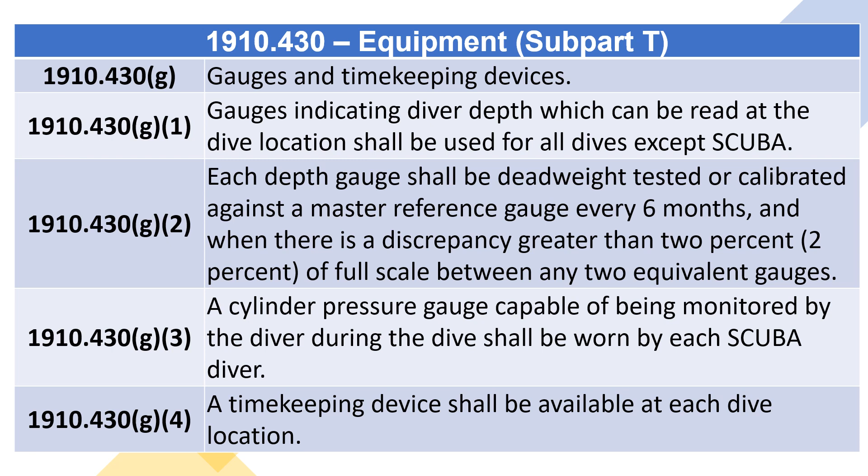1910.430(h), masks and helmets. 1910.430(h)(1): surface-supplied air and mixed gas masks and helmets shall have a non-return valve at the attachment point between helmet or mask and hose, which shall close readily and positively, and an exhaust valve.

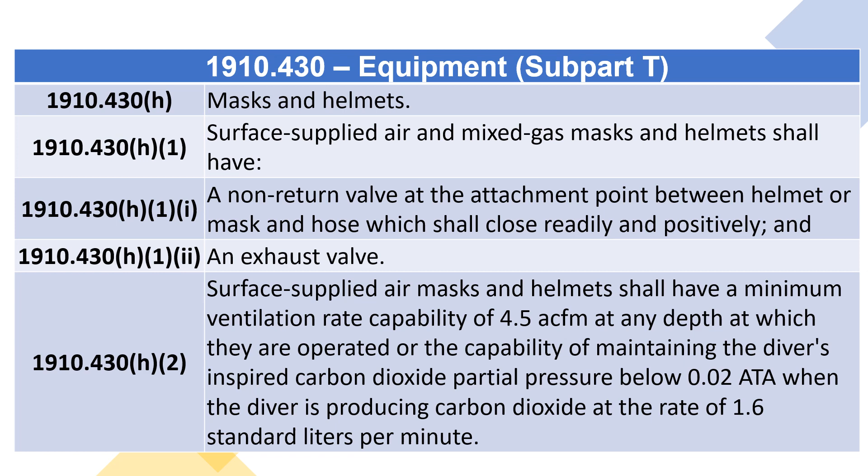1910.430(h)(2): surface-supplied air masks and helmets shall have a minimum ventilation rate capability of 4.5 acfm at any depth at which they are operated, or the capability of maintaining the diver's inspired carbon dioxide partial pressure below 0.02 ATA, when the diver is producing carbon dioxide at the rate of 1.6 standard liters per minute.

1910.430(i), oxygen safety. 1910.430(i)(1): equipment used with oxygen or mixtures containing over 40% by volume oxygen shall be designed for oxygen service. 1910.430(i)(2): components, except umbilicals, exposed to oxygen or mixtures containing over 40% by volume oxygen shall be cleaned of flammable materials before use.

1910.430(i)(3): oxygen systems over 125 psig and compressed air systems over 500 psig shall have slow opening shutoff valves. 1910.430(j), weights and harnesses.

1910.430 J1: Except when heavy gear is worn, divers shall be equipped with a weight belt or assembly capable of quick release.

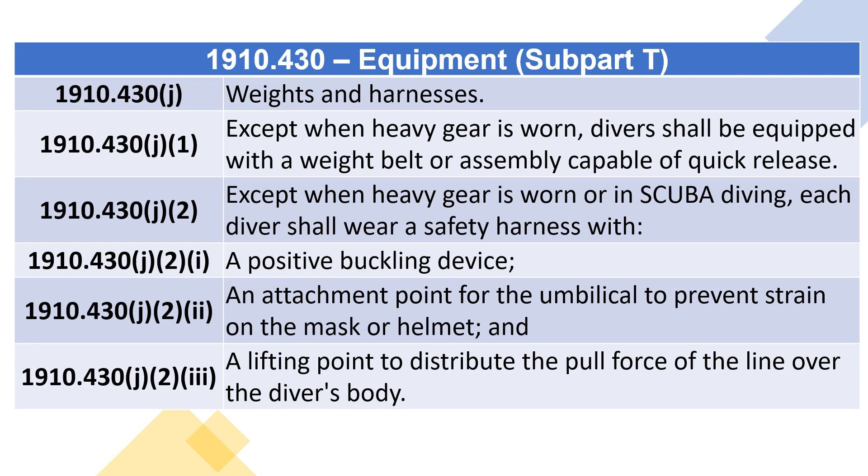1910.430 J2: Except when heavy gear is worn or in scuba diving, each diver shall wear a safety harness with a positive buckling device, an attachment point for the umbilical to prevent strain on the mask or helmet, and a lifting point to distribute the pull force of the line over the diver's body.

1910.440 Recordkeeping. 1910.440 A1, reserved. 1910.440 A2: The employer shall record the occurrence of any diving-related injury or illness which requires any dive team member to be hospitalized for 24 hours or more, specifying the circumstances of the incident and the extent of any injuries or illnesses.

1910.440 B, availability of records. 1910.440 B1: Upon the request of the Assistant Secretary of Labor for Occupational Safety and Health, or the Director, National Institute for Occupational Safety and Health, Department of Health and Human Services, or their designees, the employer shall make available for inspection and copying any record or document required by this standard.

1910.440 B2: Records and documents required by this standard shall be provided upon request to employees, designated representatives, and the Assistant Secretary in accordance with 29 CFR 1910.1020 A-E and G-I. Safe Practices Manuals, Section 1910.420, Depth Time Profiles, Section 1910.422, Recordings of Dives, Section 1910.423, Decompression Procedure Assessment Evaluations, Section 1910.423, and Records of Hospitalizations, Section 1910.440, shall be provided in the same manner as employee exposure records or analyses using exposure or medical records.

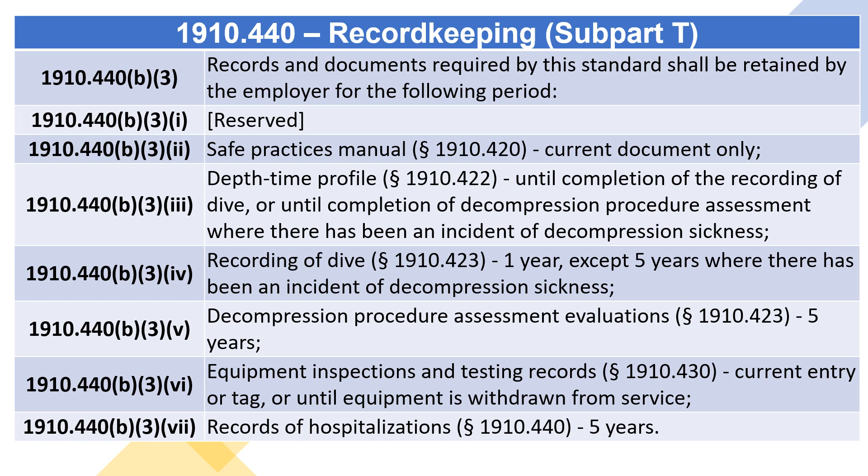Decompression procedure assessment evaluations, Section 1910.423, 5 years. Equipment inspections and testing records, Section 1910.430, current entry or tag, or until equipment is withdrawn from service. Records of hospitalizations, Section 1910.440, 5 years.

1910.440(b)(4): The employer shall comply with any additional requirements set forth at 29 CFR 1910.1020. 1910.440(b)(5), reserved. 1910 Subpart T Appendix A.

Examples of conditions which may restrict or limit exposure to hyperbaric conditions. Appendix A to Subpart T of Part 1910. The following disorders may restrict or limit occupational exposure to hyperbaric conditions depending on severity, presence of residual effects, response to therapy, number of occurrences, diving mode, or degree and duration of isolation.

History of seizure disorder other than early febrile convulsions. Malignancies, active, unless treated and without recurrence for 5 years. Chronic inability to equalize sinus and or middle ear pressure. Cystic or cavitary disease of the lungs. Impaired organ function caused by alcohol or drug use. Conditions requiring continuous medication for control, e.g., antihistamines, steroids, barbiturates, mood-altering drugs, or insulin.

Meniere's disease. Hemoglobinopathies. Obstructive or restrictive lung disease. Vestibular end organ destruction. Pneumothorax. Cardiac abnormalities, e.g., pathological heart block, valvular disease, intraventricular conduction defects other than isolated right bundle branch block, angina pectoris, arrhythmia, coronary artery disease. Juxta-articular osteonecrosis. 1910 Subpart T Appendix B.

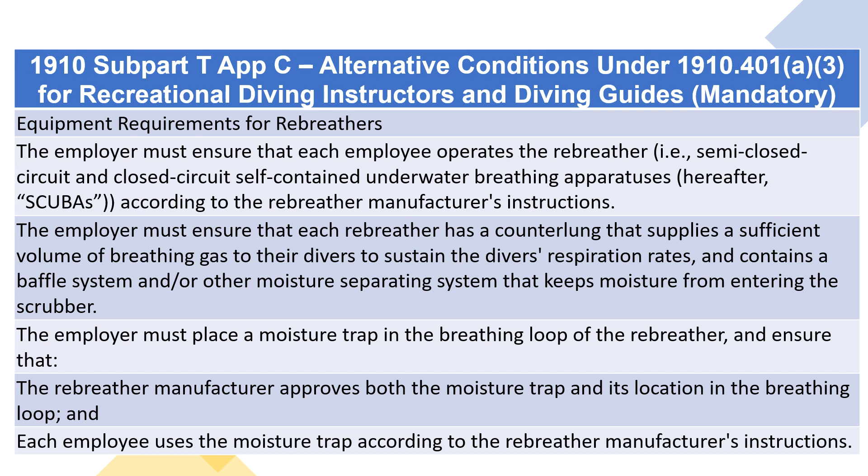The employer must ensure that each rebreather has a continuously functioning moisture sensor and that the moisture sensor connects to a visual, e.g., digital, graphic, analog, or auditory, e.g., voice, pure tone, alarm that is readily detectable by the diver under the diving conditions in which the diver operates, and warns the diver of moisture in the breathing loop in sufficient time to terminate the dive and return safely to the surface. Each diver uses the moisture sensor according to the rebreather manufacturer's instructions.

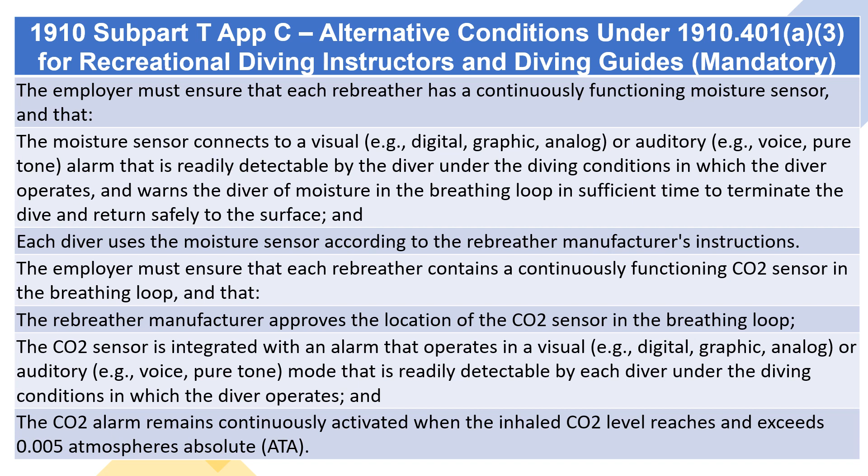The employer must ensure that each rebreather contains a continuously functioning CO2 sensor in the breathing loop, and that the rebreather manufacturer approves the location of the CO2 sensor in the breathing loop. The CO2 sensor is integrated with an alarm that operates in a visual, e.g., digital, graphic, analog, or auditory, e.g., voice, pure tone, mode that is readily detectable by each diver under the diving conditions in which the diver operates. The CO2 alarm remains continuously activated when the inhaled CO2 level reaches and exceeds 0.005 atmospheres absolute, ATA.

Before each day's diving operations, and more often when necessary, the employer must calibrate the CO2 sensor according to the sensor manufacturer's instructions and ensure that the equipment and procedures used to perform this calibration are accurate to within 10% of a CO2 concentration of 0.005 ATA or less. The equipment and procedures maintain this accuracy as required by the sensor manufacturer's instructions, and the calibration of the CO2 sensor is accurate to within 10% of a CO2 concentration of 0.005 ATA or less.

The employer must replace the CO2 sensor when it fails to meet the accuracy requirements specified in paragraph 1F3 of this appendix, and ensure that the replacement CO2 sensor meets the accuracy requirements specified in paragraph 1F3 of this appendix before placing the rebreather in operation.

As an alternative to using a continuously functioning CO2 sensor, the employer may use a schedule for replacing CO2 sorbent material provided by the rebreather manufacturer. The employer may use such a schedule only when the rebreather manufacturer has developed it according to the canister testing protocol specified below in Condition 11, and must use the canister within the temperature range for which the manufacturer conducted its scrubber canister tests following that protocol. Variations above or below the range are acceptable only after the manufacturer adds the lower or higher temperature to the protocol.

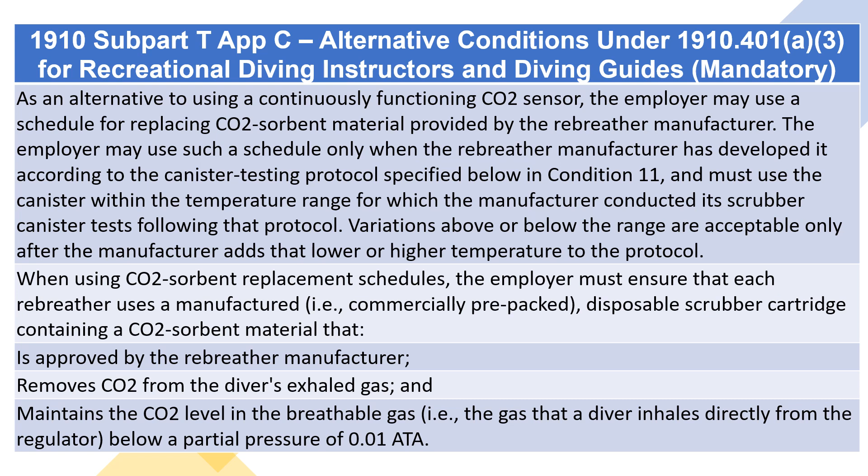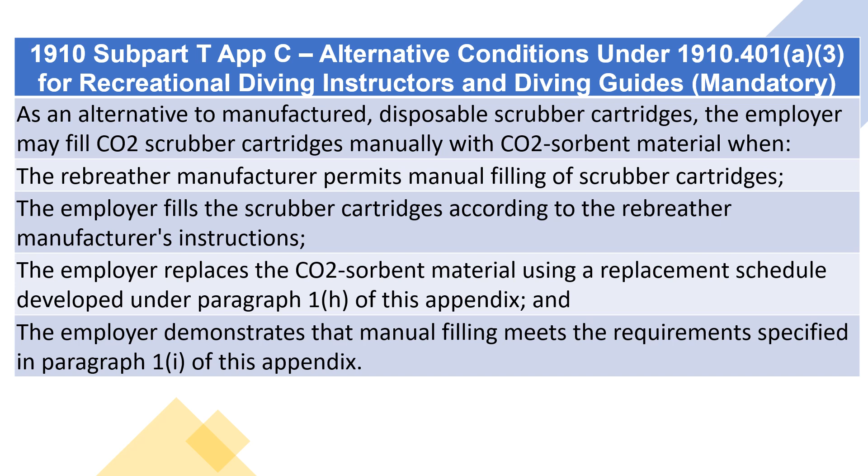As an alternative to manufactured, disposable scrubber cartridges, the employer may fill CO2 scrubber cartridges manually with CO2 sorbent material when the rebreather manufacturer permits manual filling of scrubber cartridges. The employer fills the scrubber cartridges according to the rebreather manufacturer's instructions, replaces the CO2 sorbent material using a replacement schedule developed under paragraph 1H of this appendix, and demonstrates that manual filling meets the requirements specified in paragraph 1I of this appendix.

The employer must ensure that each rebreather has an information module that provides a visual, e.g., digital, graphic, analog, or auditory, e.g., voice, pure tone, display that effectively warns the diver of solenoid failure when the rebreather uses solenoids and other electrical weaknesses or failures, e.g., low battery voltage.

For a semi-closed circuit rebreather, a visual display for the partial pressure of CO2, or deviations above and below a preset CO2 partial pressure of 0.005 ATA, and for a closed circuit rebreather, a visual display for partial pressures of O2 and CO2, or deviations above and below a preset CO2 partial pressure of 0.005 ATA and a preset O2 partial pressure of 1.40 ATA or lower, gas temperature in the breathing loop, and water temperature.

Before each day's diving operations, and more often when necessary, the employer must ensure that the electrical power supply and electrical and electronic circuits in each rebreather are operating as required by the rebreather manufacturer's instructions.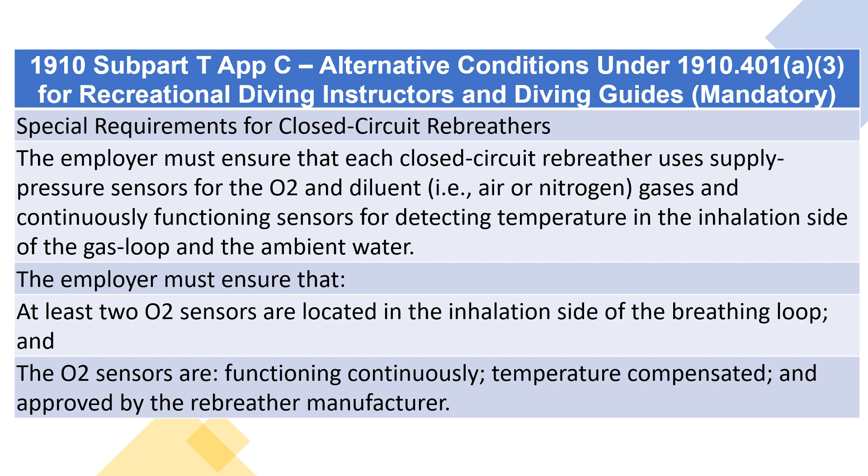Special requirements for closed-circuit rebreathers: the employer must ensure that each closed-circuit rebreather uses supply pressure sensors for the O2 and diluent gases, and continuously functioning sensors for detecting temperature in the inhalation side of the gas loop and the ambient water. At least two O2 sensors must be located in the inhalation side of the breathing loop, functioning continuously, temperature compensated, and approved by the rebreather manufacturer.

Before each day's diving operations, and more often when necessary, the employer must calibrate O2 sensors as required by the sensor manufacturer's instructions, ensuring that the equipment and procedures used are accurate to within 1% of the O2 fraction by volume, and maintaining this accuracy as required by the calibration equipment manufacturer, ensuring the sensors remain accurate to within 1%.

Replace O2 sensors when they fail to meet the accuracy requirements specified in paragraph 2(c)(iii) of this appendix, and ensure that replacement O2 sensors meet those accuracy requirements before placing a rebreather in operation.

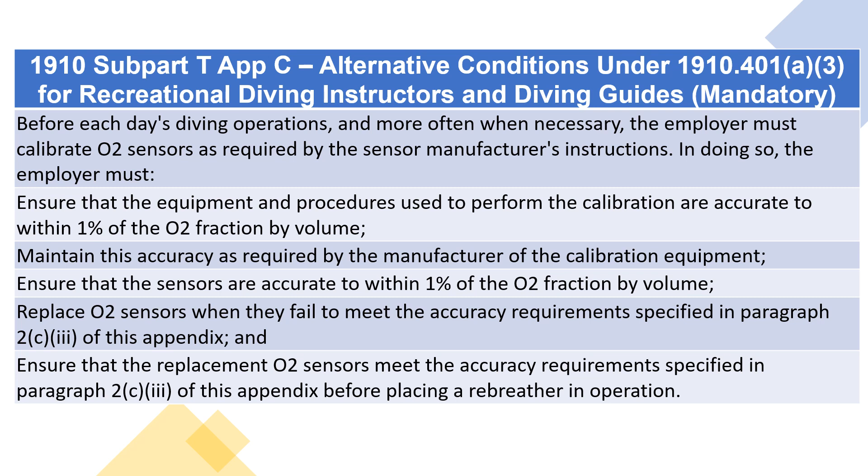The employer must ensure that each closed-circuit rebreather has a gas controller package with electrically operated solenoid O2 supply valves, a pressure-activated regulator with a second-stage diluent gas addition valve, a manually operated gas supply bypass valve to add O2 or diluent gas to the breathing loop, and separate O2 and diluent gas cylinders to supply the breathing gas mixture.

O2 concentration in the breathing gas: the employer must ensure that the fraction of O2 in the nitrox breathing gas mixture is greater than the fraction of O2 in compressed air, i.e., exceeds 22% by volume.

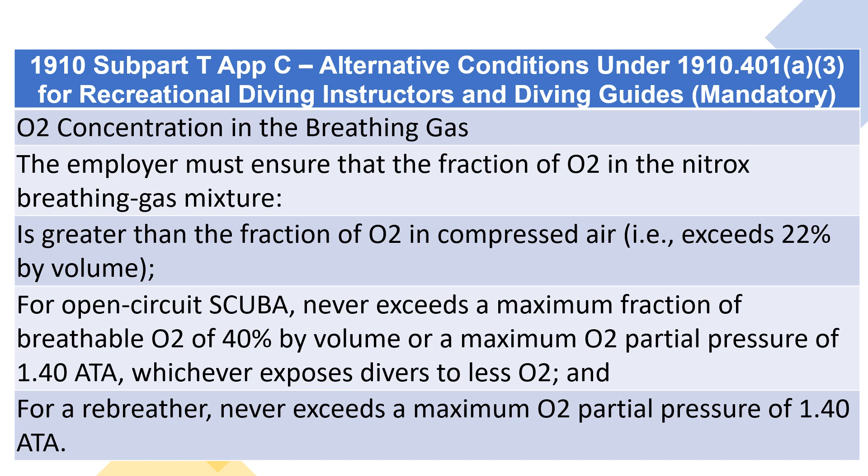For open-circuit SCUBA, the mixture must never exceed a maximum fraction of breathable O2 of 40% by volume or a maximum O2 partial pressure of 1.40 ATA, whichever exposes divers to less O2. For a rebreather, it must never exceed a maximum O2 partial pressure of 1.40 ATA.

Regulating O2 exposures and diving depth: regarding O2 exposure, the employer must ensure that the exposure of each diver to partial pressures of O2 between 0.60 and 1.40 ATA does not exceed the 24-hour single exposure time limit specified either by the 2001 NOAA Diving Manual, or by the report entitled Enriched Air Operations and Resource Guide published in 1995 by the Professional Association of Diving Instructors, known commonly as the 1995 DSAT Oxygen Exposure Table.

The employer must determine a diver's O2 exposure duration using the diver's maximum O2 exposure, partial pressure of O2 during the dive, and the total dive time, i.e., from the time the diver leaves the surface until the diver returns to the surface.

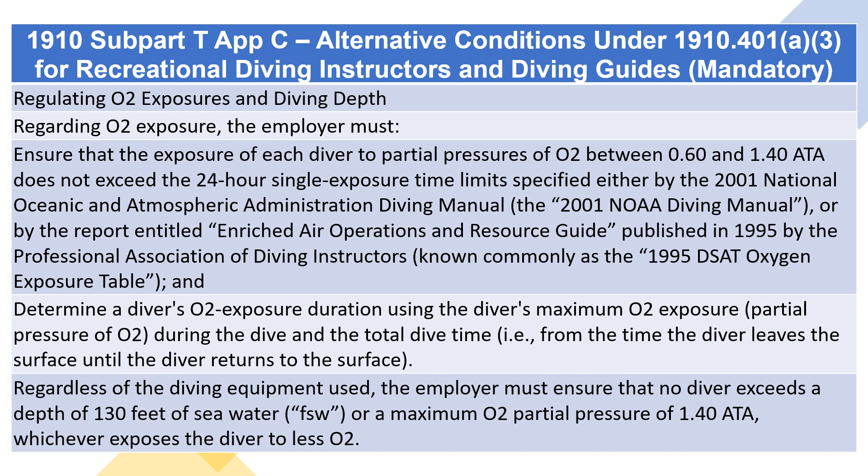Regardless of the diving equipment used, the employer must ensure that no diver exceeds a depth of 130 feet of seawater, FSW, or a maximum O2 partial pressure of 1.40 ATA, whichever exposes the diver to less O2.

Use of no decompression limits: for diving conducted while using nitrox breathing gas mixtures, the employer must ensure that each diver remains within the no decompression limits specified for single and repetitive air diving and published in the 2001 NOAA Diving Manual or the report entitled Development and Validation of No-Stop Decompression Procedures for Recreational Diving, the DSAT Recreational Dive Planner, published in 1994 by Hamilton Research Limited, known commonly as the 1994 DSAT No Decompression Tables.

An employer may permit a diver to use a dive decompression computer designed to regulate decompression when the dive decompression computer uses the no decompression limits specified in paragraph 5(a) of this appendix, and provides output that reliably represents those limits. Mixing and analyzing the breathing gas.

The employer must ensure that properly trained personnel mix nitrox breathing gases, and that nitrogen is the only inert gas used in the breathing gas mixture. When mixing nitrox breathing gases, they must mix the appropriate breathing gas before delivering the mixture to the breathing gas cylinders, using the continuous flow or partial pressure mixing techniques specified in the 2001 NOAA Diving Manual, or using a filter membrane system.

Before the start of each day's diving operations, the employer must determine the O2 fraction of the breathing gas mixture using an O2 analyzer, ensuring that the O2 analyzer is accurate to within 1% of the O2 fraction by volume.

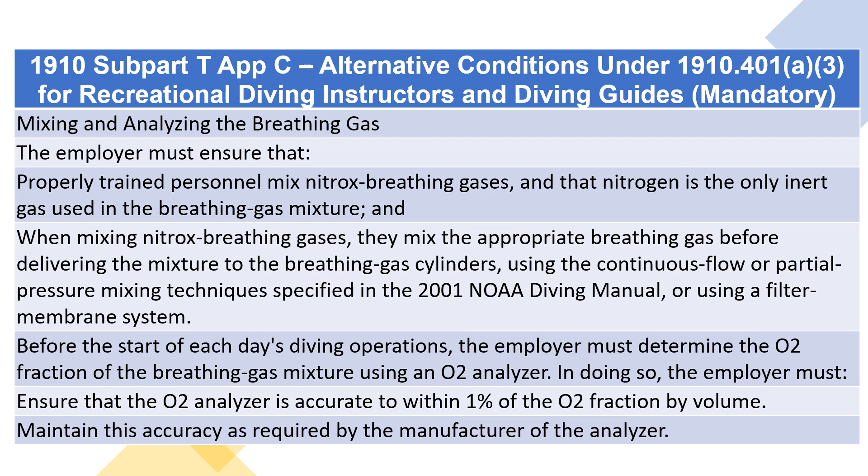Maintain this accuracy as required by the manufacturer of the analyzer. When the breathing gas is a commercially supplied nitrox breathing gas mixture, the employer must ensure that the O2 meets the medical USP specifications, Type 1, Quality Verification Level A, or aviators breathing oxygen specifications, Type 1, Quality Verification Level E, of CGA G-4.3-2000, Commodity Specification for Oxygen.

In addition, the commercial supplier must determine the O2 fraction in the breathing gas mixture using an analytic method accurate to within 1% of the O2 fraction by volume. Make this determination when the mixture is in the charged tank and after disconnecting the charged tank from the charging apparatus. Include documentation of the O2 analysis procedures and the O2 fraction when delivering the charged tanks to the employer.

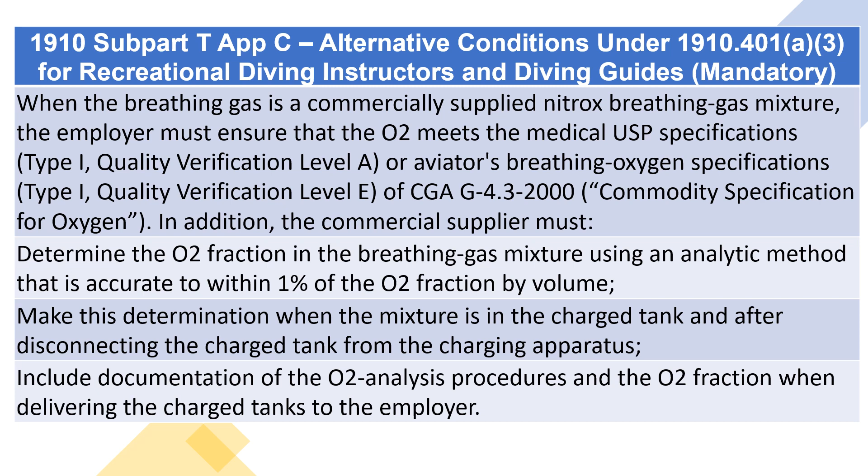Before producing nitrox breathing gas mixtures using a compressor in which the gas pressure in any system component exceeds 125 pounds per square inch, the compressor manufacturer must provide the employer with documentation that the compressor is suitable for mixing high-pressure air with the highest O2 fraction used in the nitrox breathing gas mixture, when operated according to the manufacturer's operating and maintenance specifications.

Before producing nitrox breathing gas mixtures using an oil-lubricated compressor to mix high-pressure air with O2, and regardless of the gas pressure in any system component, the employer must use only uncontaminated air, i.e., air containing no hydrocarbon particulates, for the nitrox breathing gas mixture.

The compressor manufacturer must provide the employer with documentation that the compressor is suitable for mixing the high-pressure air with the highest O2 fraction used in the nitrox breathing gas mixture, when operated according to the manufacturer's operating and maintenance specifications.

The employer must filter the high-pressure air to produce O2-compatible air. The filter system manufacturer must provide the employer with documentation that the filter system used for this purpose is suitable for producing O2-compatible air when operated according to the manufacturer's operating and maintenance specifications. The employer must continuously monitor the air downstream from the filter for hydrocarbon contamination.

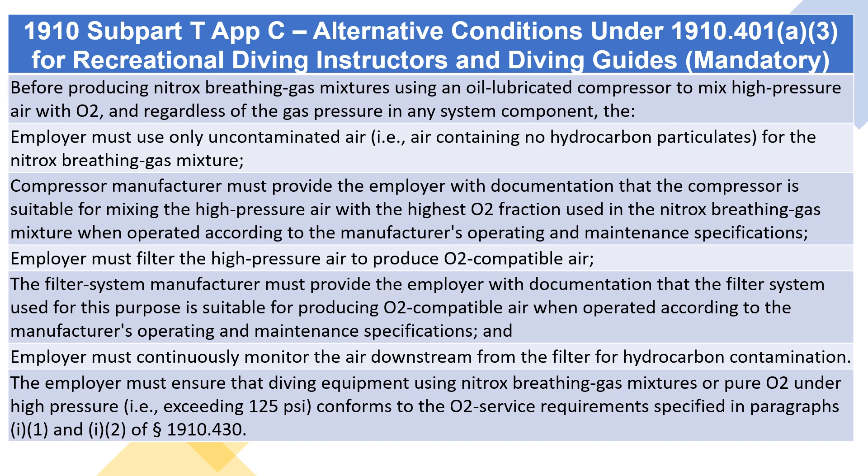The employer must ensure that diving equipment using nitrox breathing gas mixtures or pure O2 under high pressure, i.e., exceeding 125 psi, conforms to the O2 service requirements specified in paragraphs I-1 and I-2 of section 1910.430.

Emergency egress. Regardless of the type of diving equipment used by a diver, i.e., open-circuit scuba or rebreathers, the employer must ensure that the equipment contains, or incorporates, an open-circuit emergency egress system, a bailout system, in which the second stage of the regulator connects to a separate supply of emergency breathing gas, and the emergency breathing gas consists of air or the same nitrox breathing gas mixture used during the dive.

As an alternative to the bailout system specified in paragraph 7(a) of this appendix, the employer may use, for open-circuit scuba, an emergency egress system as specified in section 1910.424 C4, or for a semi-closed circuit and closed-circuit rebreather, a system configured so that the second stage of the regulator connects to a reserve supply of emergency breathing gas.

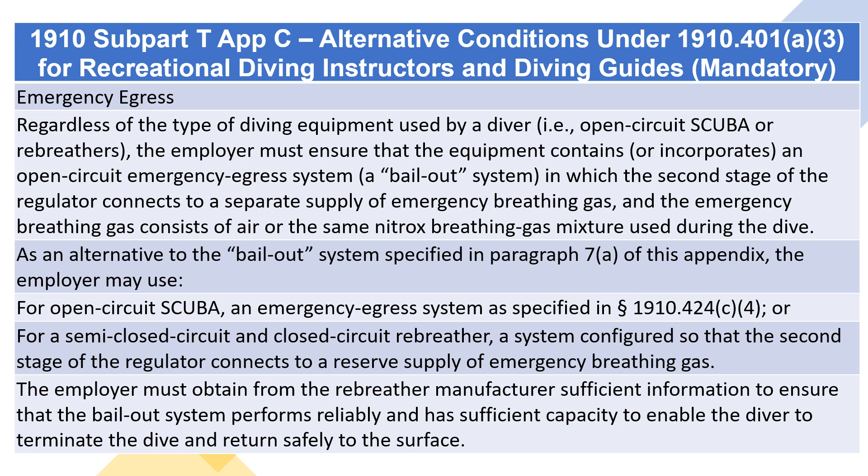The employer must obtain from the rebreather manufacturer sufficient information to ensure that the bailout system performs reliably and has sufficient capacity to enable the diver to terminate the dive and return safely to the surface.

Treating diving-related medical emergencies. Before each day's diving operations, the employer must verify that a hospital, qualified healthcare professionals, and the nearest Coast Guard Rescue Coordination Center, or an equivalent rescue service operated by a state, county, or municipal agency, are available to treat diving-related medical emergencies.

Ensure that each dive site has a means to alert these treatment resources in a timely manner when a diving-related medical emergency occurs. And ensure that transportation to a suitable decompression chamber is readily available when no decompression chamber is at the dive site, and that this transportation can deliver the injured diver to the decompression chamber within 4 hours travel time from the dive site.

The employer must ensure that portable O2 equipment is available at the dive site to treat injured divers. In doing so, the employer must ensure that the equipment delivers medical-grade O2 that meets the requirements for medical USP oxygen, Type 1, Quality Verification Level A, of CGA G-4.3-2000, Commodity Specification for Oxygen.

The equipment delivers this O2 to a transparent mask that covers the injured diver's nose and mouth, and sufficient O2 is available for administration to the injured diver from the time the employer recognizes the symptoms of a diving-related medical emergency until the injured diver reaches a decompression chamber for treatment.

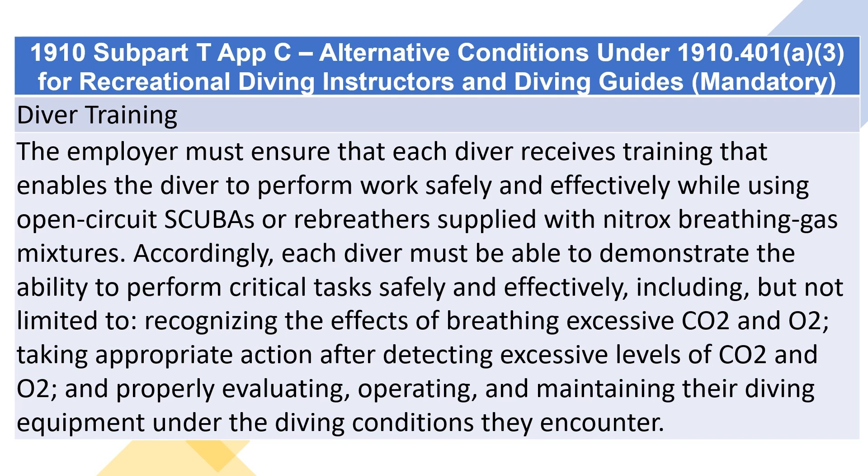Accordingly, each diver must be able to demonstrate the ability to perform critical tasks safely and effectively, including, but not limited to, recognizing the effects of breathing excessive CO2 and O2, taking appropriate action after detecting excessive levels of CO2 and O2, and properly evaluating, operating, and maintaining their diving equipment under the diving conditions they encounter.

Testing protocol for determining the CO2 limits of rebreather canisters. The employer must ensure that the rebreather manufacturer has used the following procedures for determining that the CO2 sorbent material meets the specifications of the sorbent materials manufacturer: the North Atlantic Treating Organization CO2 Absorbent Activity Test, the ROTAP Shaker and Nested Sieves Test, the Navy Experimental Diving Unit (NEDU) Derived Schlegel Test, and the NEDU MeshFit software.

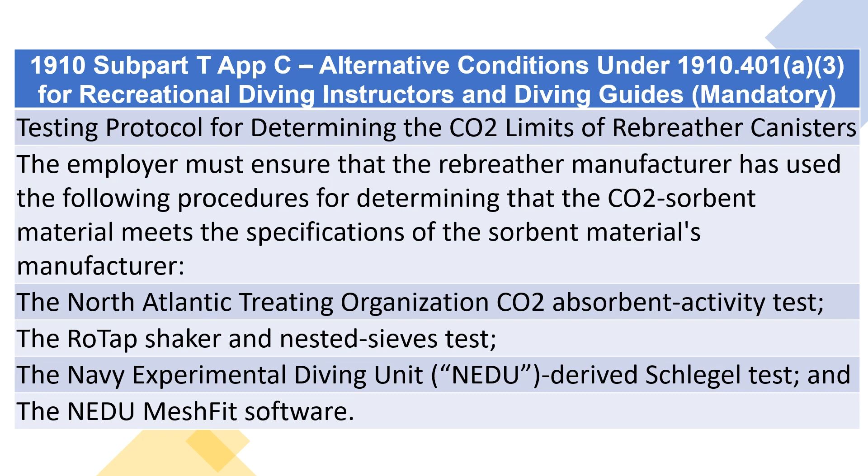The employer must ensure that the rebreather manufacturer has applied the following canister testing materials, methods, procedures, and statistical analyses: use of a nitrox breathing gas mixture that has an O2 fraction maintained at 0.28, equivalent to 1.4 ATA of O2 at 130 FSW, the maximum O2 concentration permitted at this depth, while operating the rebreather at a maximum depth of 130 FSW. Use of a breathing machine to continuously ventilate the rebreather with breathing gas that is at 100% humidity and warmed to a temperature of 98.6 degrees Fahrenheit, 37 degrees Celsius, in the heating humidification chamber.

Measurement of the CO2 concentration of the inhalation breathing gas delivered to the mouthpiece. Testing of the canisters using the 3 ventilation rates listed in Table I below, with the required breathing machine tidal volumes and frequencies, and CO2 injection rates, provided for each ventilation rate. See Table I, Canister testing parameters.

When using a work rate, i.e., breathing machine tidal volume and frequency, other than the work rates listed in the table above, addition of the appropriate combinations of ventilation rates and CO2 injection rates, performance of the CO2 injection at a constant, steady, and continuous rate during each testing trial, determination of canister duration using a minimum of 4 water temperatures, including 40, 50, 70, and 90 degrees Fahrenheit, 4.4, 10.0, 21.1, and 32.2 degrees Celsius, respectively.

Monitoring of the breathing gas temperature at the rebreather mouthpiece, at the Chrome T connector, and ensuring that this temperature conforms to the temperature of a diver's exhaled breath at the water temperature and ventilation rate used during the testing trial.

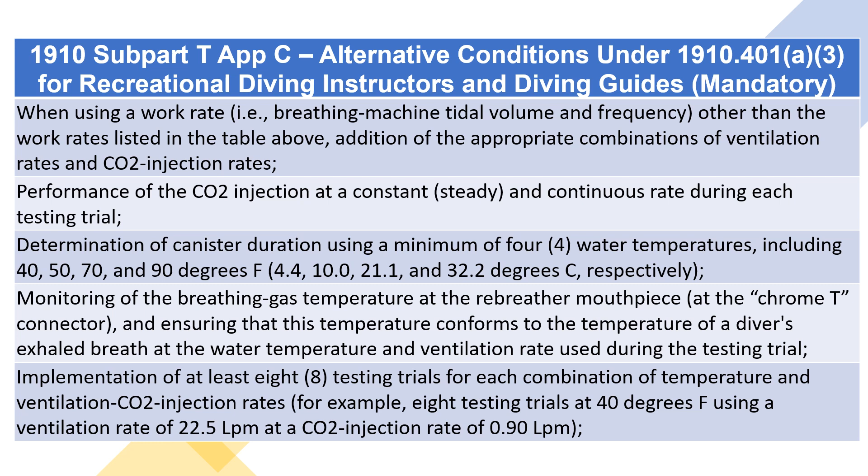Implementation of at least 8 testing trials for each combination of temperature and ventilation CO2 injection rates, for example, 8 testing trials at 40 degrees Fahrenheit using a ventilation rate of 22.5 lpm at a CO2 injection rate of 0.90 lpm, allowing the water temperature to vary no more than plus or minus 2.0 degrees Fahrenheit, plus or minus 1.0 degrees C, between each of the 8 testing trials, and no more than plus or minus 1.0 degree F, plus or minus 0.5 degrees C, within each testing trial.

Use of the average temperature for each set of 8 testing trials in the statistical analysis of the testing trial results, with the testing trial results being the time taken for the inhaled breathing gas to reach 0.005 ATA of CO2, i.e., the canister duration results. Analysis of the canister duration results using the repeated measure statistics described in NEDU Report 2-99.

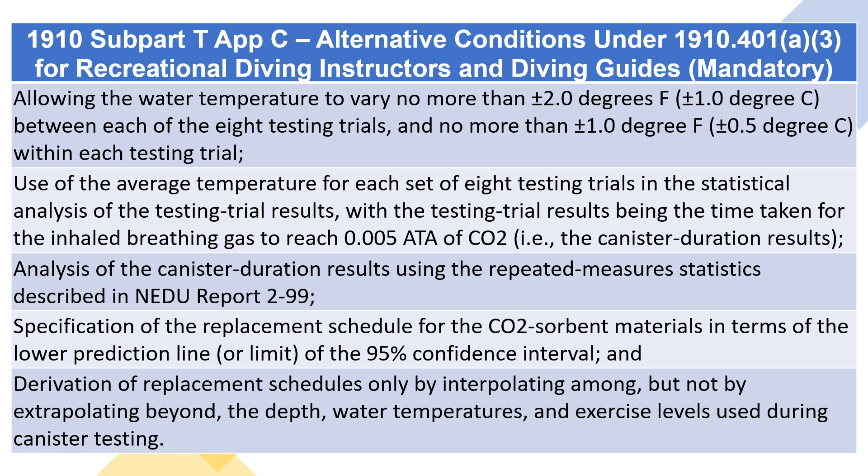Specification of the replacement schedule for the CO2 sorbent materials in terms of the lower prediction line, or limit, of the 95% confidence interval, and derivation of replacement schedules only by interpolating among, but not by extrapolating beyond, the depth, water temperatures, and exercise levels used during canister testing.